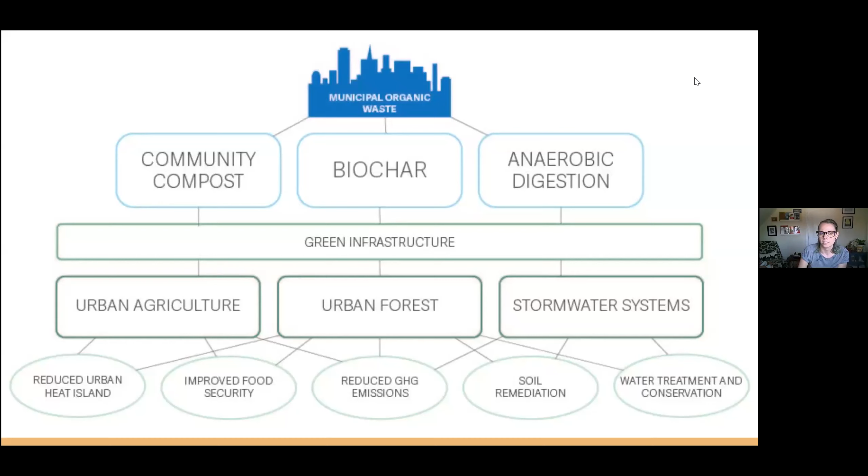Next slide. So we made this graphic to kind of explain our thought process. So we're diverting municipal organic waste from Long Beach into sort of 3 segments. We're going to take the peak organic material and divert it into community compost projects that would stay within Long Beach. Tree trimmings and large wood matter would go into biochar production, and then everything that wasn't suitable for community compost would be diverted into an anaerobic digester. Now, what we would do is take all of the products from this and implement them into green infrastructure projects that are happening in Long Beach, specifically urban agriculture, the urban canopy, and stormwater systems for specific benefits.

Next slide. So there were lots of benefits, but we're focusing on estimating the benefits of reduced greenhouse gas emissions, water treatment and conservation, and a reduction of the urban heat island effect. Next slide. And I'm going to introduce Emma and Ruby, who are going to take you through the stormwater analysis.

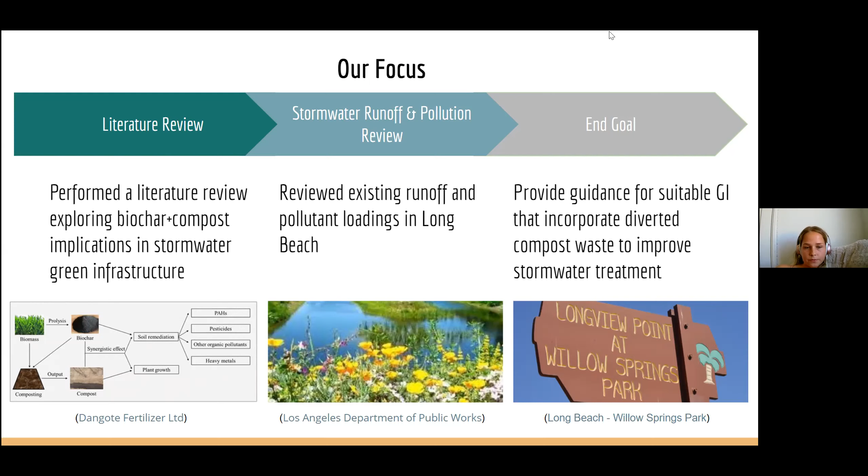So for our end goals, we're basically hoping to review research on compost and biochar-based stormwater contaminant conditions in Long Beach in hopes to provide guidance for suitable green infrastructure that incorporates diverted waste to treat stormwater in a more sustainable manner. And the Willow Springs Restoration Project is something that we hope to include as well. It provides a useful example of existing compatible green infrastructure elements and BMPs for urban stormwater treatment. And we're hoping to use these existing examples as a foundation for more compatible BMP types in Long Beach's region and its pollutant background.

Okay, and the main benefits that we found in our literature review for compost were increased plant nutrition, increase in unwanted substance removal, and then also it helps utilize food waste. The limitations that were found were leaching, and the use of immature compost can take away some of the benefits that you would get from a mature compost.

For biochar, the main benefits were additional unwanted substance removal, increased microbial activity, and carbon sequestration, which helps combat climate change. It's also important to note that biochar's absorptive properties help combat leaching in compost by having nutrients released slower, so that we would be able to decrease the runoff from a first flush scenario through compost.

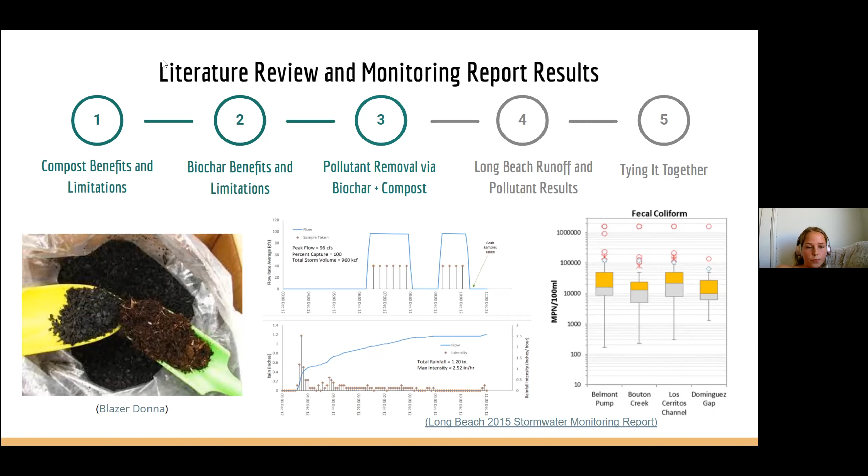So some of the pollutants that we found from literature that are removed via biochar and compost combinations include phosphorus, nitrogen, polyaromatic hydrocarbons, microbes, dissolved metals, and oil, grease, even pesticides. And you can see an example on the bottom right of fecal coliform bacteria loadings that were reported from the Long Beach monitoring report.

So what we also discovered was that across literature, phosphorus tends to have a lot of variability. For example, some compost helped, but other composts failed to make a difference in pollutant removal, and even some worsened nutrient leaching. But the key idea is that biochar has the potential to improve treatment in compost-based systems by absorbing water and nutrients and then slowly releasing that over time. And that's great for plant growth, and it also prevents the effects of the first flush pollutant discharge.

And some of our other data came from the Long Beach monitoring report. You can see that in the middle. From this, we were able to gather a lot of data about the peak flow conditions, the stormwater volumes, rainfall, max intensity. And again, in the end, what we're doing is using all this data to summarize suitable combinations of biochar and compost ratios, as well as their types for use in Long Beach's existing stormwater and pollution background.

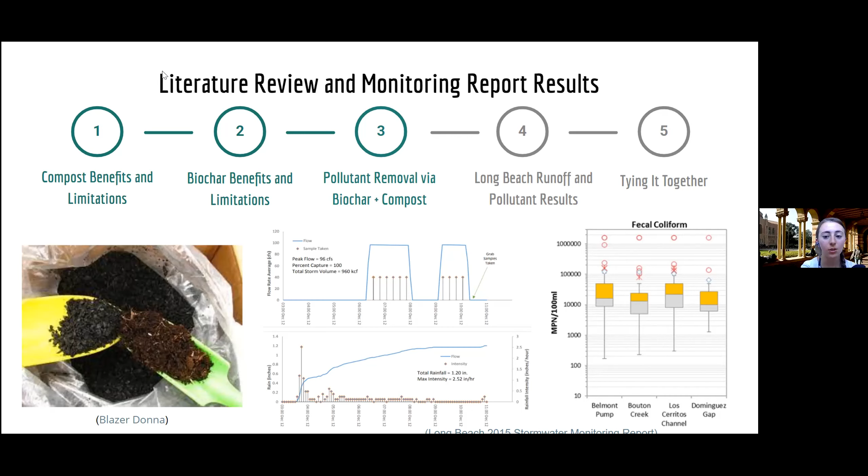And with that, I'll pass it on to the Urban Heat Island Effect group. Thanks, Emma. Yeah, so for our section, you can go on to the next slide.

We also structured it similarly to the stormwater treatment section, where we started with a lit review. And with that, we looked at different ways that urban greening can translate to benefits in terms of reduced urban heat island effect. And we incorporated in our research looking at how diverted organic matter could be incorporated into those urban greening projects to both enhance growth and, by extent, enhance mitigation of urban heat island effect.

And from there, we took what we learned and applied it to a series of 3 geospatial analyses. The first was an NDVI analysis, which we used to look at greenness in Long Beach. From there, we generated some thermal maps to visualize urban heat island intensity across Long Beach. And then we wrapped it up with some reference maps that looked at other relevant information, such as various socioeconomic factors. Next slide, please.

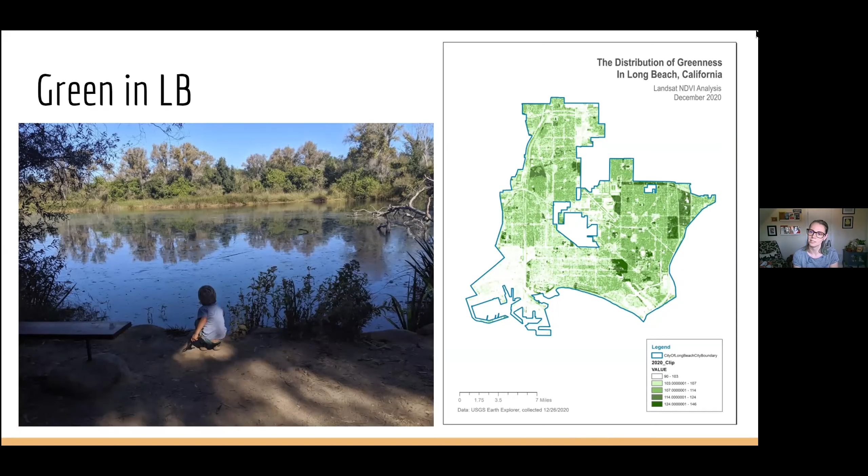And with that, we're going to pass it on to Ryan, Haley, and Tommy to talk about greenhouse gas emissions.

We also wanted to quantify the amount of greenhouse gas emissions that would be saved by switching to this diverted waste model. One way we mapped this was by combining results of the UHI analysis that Madeline previously talked about, as well as a literature review. With this literature review, we found estimates for an energy penalty in urban areas per unit area per UHI intensity, which allowed us to quantify the cost to cool buildings in Long Beach as a result of the warmer city climate.

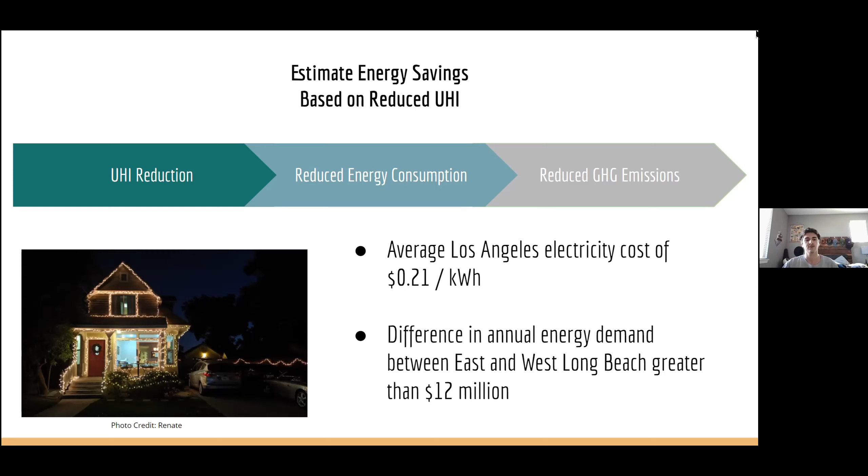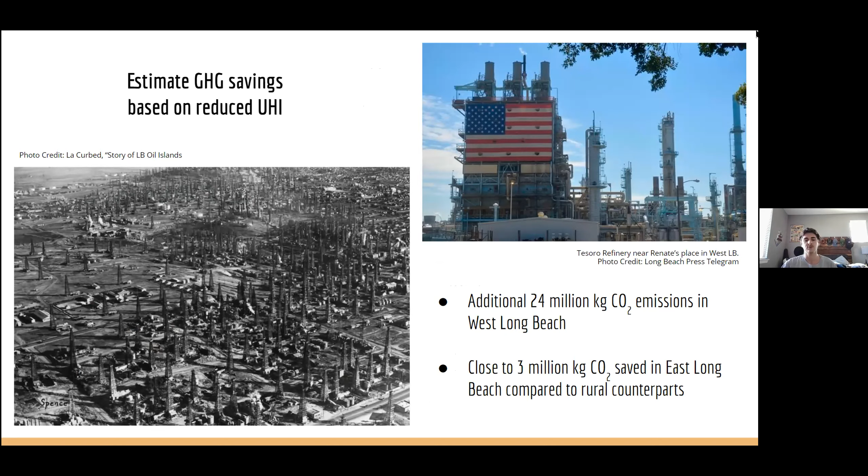Just to produce this amount of energy, there's going to be significant greenhouse gas emissions. Using average values for emissions per kilowatt hour, we found that West Long Beach would emit 24 million kilograms of CO2 per year compared to its rural counterpart, while East Long Beach would actually save 3 million kilograms of CO2 per year.

Another goal was to better understand the greenhouse gas emissions that come specifically from landfills and incinerators. We included incinerator data in our search because Long Beach operates one of the last two functioning incinerators in California. From our literature review, we found that 1 million tons of food waste in a landfill emits about 1,100 metric tons of CO2 equivalent, whereas 1 million tons of food waste in an incinerator emits between 50 and 200,000 metric tons of CO2 equivalent.

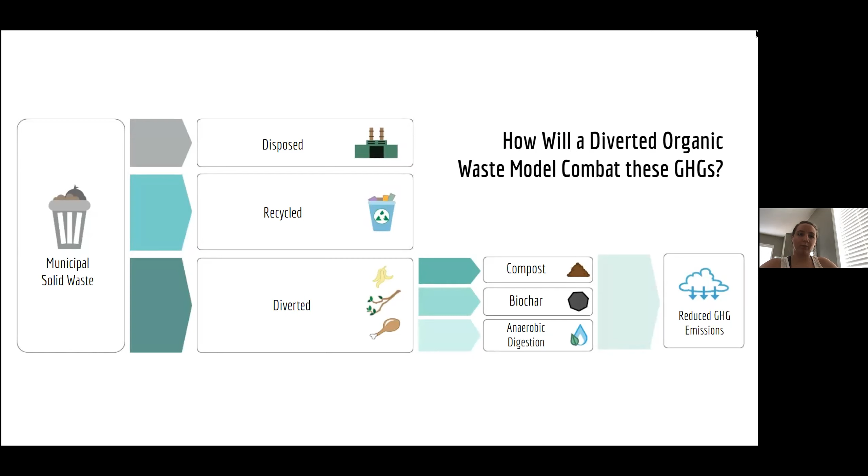So how will a diverted organic waste model combat these greenhouse gases? For one thing, the breakdown of organic material under aerobic conditions, such as composting, contributes only minimally to the short-term carbon cycle. In the case of incinerators, diverting organic waste makes the heating element much more efficient, lowering the amount of auxiliary fuel needed to run the incinerator. This leads to lowered greenhouse gas emissions and can actually lead incinerators to act as a carbon sink when paired with waste-to-energy technologies.

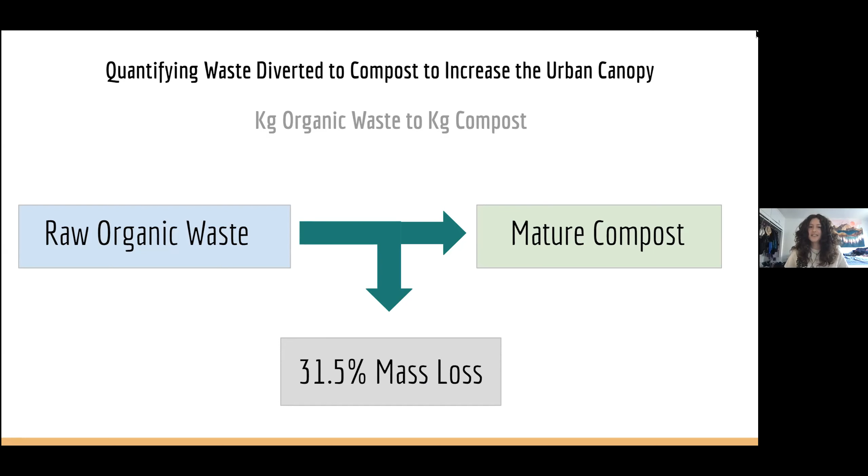The next two slides go over two different intermediary calculations done to quantify waste diverted to compost to increase the urban canopy, which would decrease greenhouse gases and the urban heat island effect. The first is a mass conversion between raw organic waste and mature compost. This is needed because during the composting process, mass is lost as microorganisms break down organic matter and release CO2. Through literature review, we found a 31.5% mass loss from raw organic waste to mature compost.

The second calculation is finding the amount of compost per tree needed to increase tree growth and expand the urban canopy. This was also done through literature review, and different studies were normalized using the nitrogen content of each compost, since nitrogen is the limiting nutrient for tree growth. From these studies, we found a value of 49 kilograms of compost needed per tree.

Thank you guys for listening and being here for our presentation. We hope you enjoyed it. And if there are any questions, go for it.

We can clap virtually.

I would say this was one of the most ambitious projects that I have ever taught. It has so many components. Normally in any quarter, I usually limit them—I say don't do too many things. But I know Renate and all the teams were really passionate, so I said, okay, whatever you guys do, this is your project. I knew the results wouldn't be affected by having so many different analyses. I want you guys to challenge each other and have discussions, because that's more important than having constrained projects. I saw that energy in your teams and in your presentations. There's just so much information and so much work you guys did. So, great. I don't have any other comments, but if you guys have any other questions, other students can ask.

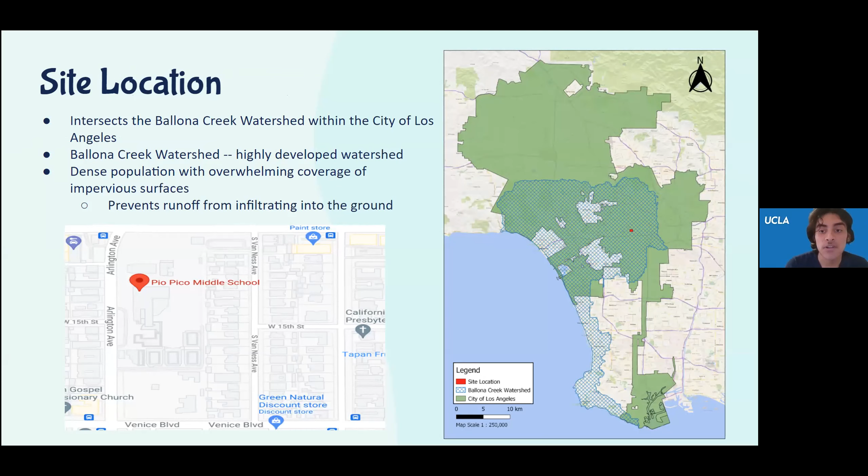To maximize the community benefits behind the Best Management Practice Project, the site will emphasize the implementation of green infrastructure at Pio Pico Middle School.

Our solution involves the implementation of three different BMPs: permeable pavements to help reduce runoff and remove pollutants, biofiltration, which filters contaminants via layers of filter media and vegetation, and a green roof, which can improve stormwater quality and reduce incoming peak flows.

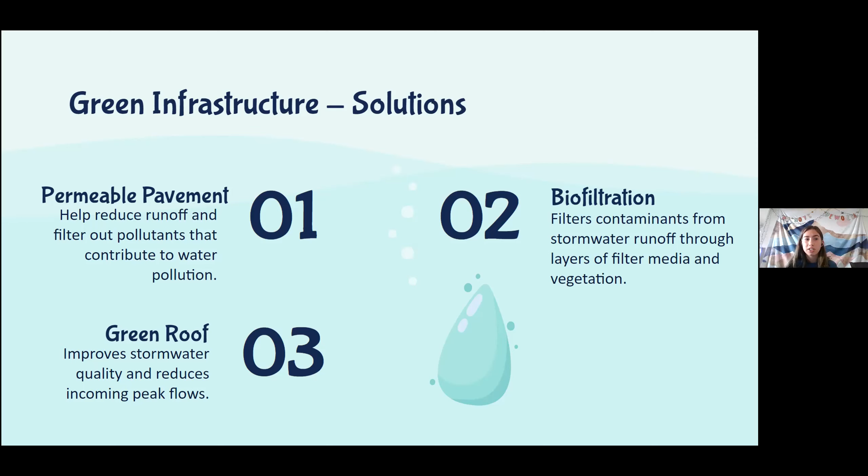The first BMP, which covers the largest surface area, will be a permeable pavement. The pervious pavement is the uppermost layer that will lie upon base materials for proper drainage. Beneath that is an open-graded crushed rock layer that will allow water to infiltrate away from the surface. We've decided to also include filter fabric in our design to retain larger particles. As water slowly moves through the layers, the groundwater table can be refilled.

Since the LA community is prone to flooding due to the high percentage of impervious surfaces, we wanted to minimize the possibility of flooding, worsening economic conditions in an already disadvantaged community. While LA does not receive very high volumes of runoff currently, we expect climate change will bring about extreme periods of wet and dry. To prepare for such events, we wanted to implement a BMP with a long lifespan and minimal maintenance.

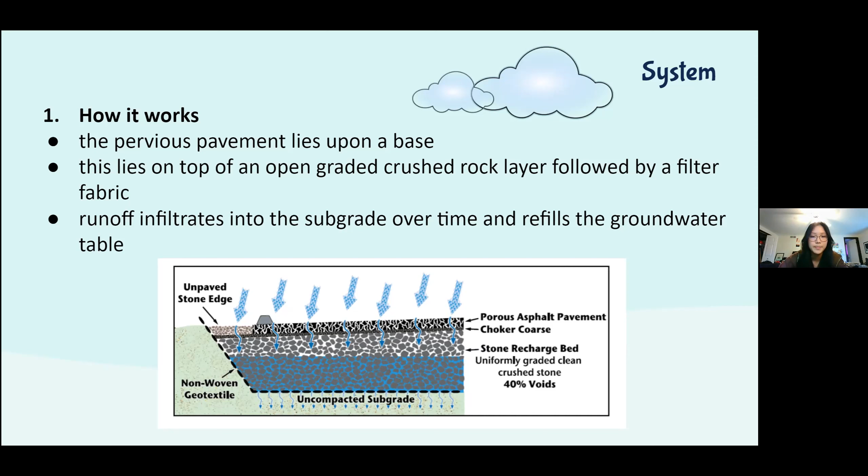This type is also less prone to cracking compared to conventional concrete options, which again can mitigate potential safety hazards.

When determining whether permeable pavements were potential solutions for the issues impacting our sites, we looked at site-specific conditions. The area has a high percentage of impervious area with little room for infiltration, which leads to nearly all the rainfall becoming runoff. As previously mentioned, the school is an economically disadvantaged area, so reducing runoff will reduce the risks of damages caused by flooding to the school and surrounding houses and families living nearby.

Also, the area which we will convert to permeable pavements does not have heavy vehicle loads or high-speed traffic or high sediment concentrations that would normally damage the pavement, so it's a good site for permeable pavements. They can also act as a sink for pollution that would normally run off impervious surfaces. The installation would not be obstructive to how the school functions, because it would just be replacing the current pavements and not taking up any more space.

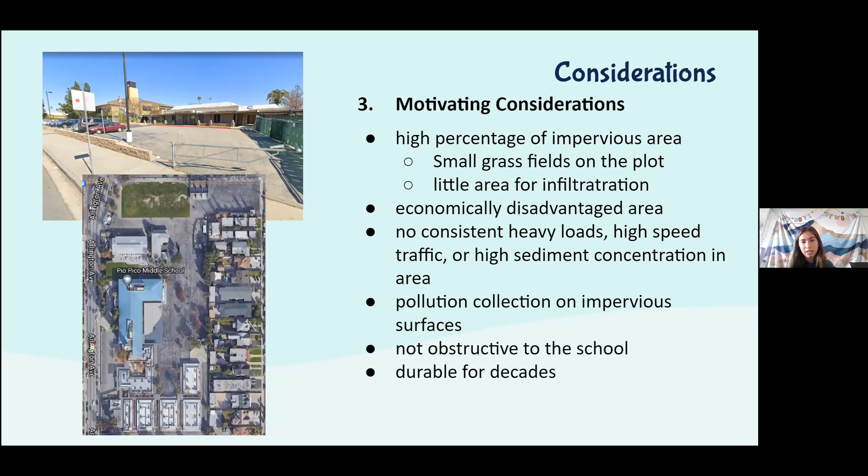They will be strong for decades with minimal maintenance, like street sweeping and vacuuming, to ensure the pores don't get clogged. And once they do get clogged, you might have to replace sections of it.

The total cost of the installation of the permeable pavement includes materials, labor, equipment, and other general requirements, and it's just a little over $1 million. For all estimates, we assumed unionized labor rates, which is generally 20-25% more cost intensive than non-union labor.

The unit of measurement is square footage. The unit cost is $6.75 per square foot. We also estimate the maintenance cost to be about $2,000 per year after installation in order to preserve the BMP and help maximize its life cycle.

I'll give it to Kathy to talk about biofiltration.

These gas stations and auto body shops are potential sources of oil and heavy metal contamination in stormwater runoff. Additionally, the large residential area surrounding the school is a source of nutrient and pesticide contamination due to the many lawns in the residential area.

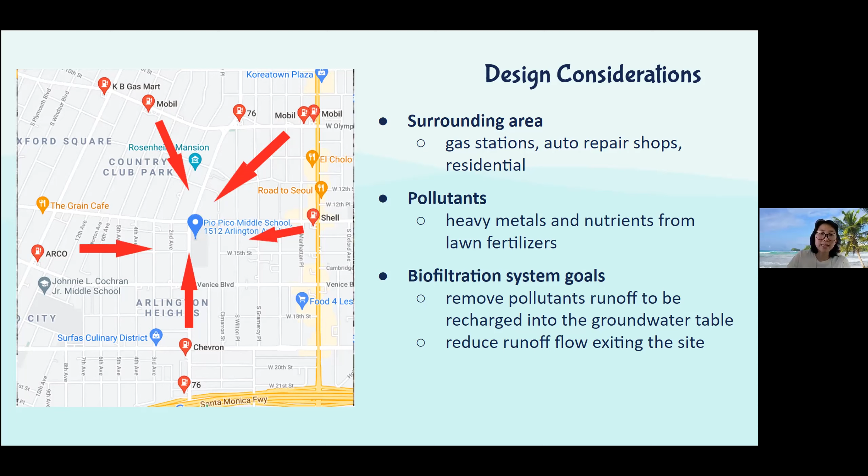In designing the biofiltration system, we calculated the design volume to be 9,188 cubic feet of runoff for the 85th percentile storm event in LA. This also takes into account the effects from the other BMPs we'll be implementing, which are the permeable pavement and green roof, making the biofiltration system the last point of treatment for runoff on the site. We then calculated the surface area needed to treat this design volume to be 4,324 square feet.

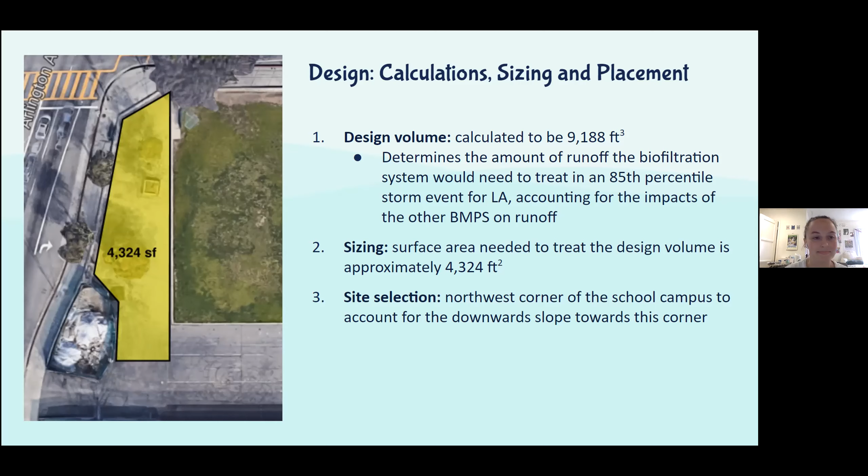The system will be 3 feet deep in total, according to LA's design criteria. The layers in the system will include 3 inches of mulch on top, filter media composed of 70% sand, 20% compost, and 10% biochar, coarse sand for the transition layer, and gravel for the bottom drainage layer. We recommend this composition for the filter media because organic media such as compost augmented by biochar has shown better results in removing the pollutants we're trying to address at this site.

For the vegetation in the system, it must be suitable for the dry climate in LA. So we recommend using both the California meadow sedge and the clustered field sedge because both species are native to Southern California and are both drought and flood resistant. Grasses are also more suitable for biofiltration systems in urban areas, and both species are tolerant of foot traffic, which would be a benefit for a school campus where there might be heavy foot traffic.

The biofiltration estimate was similar to the permeable pavement. We had the same assumptions for unit labor costs and unit measurement. The only difference is the unit cost, which is about $9.80 per square foot, and it's a lot higher than the other costs because the bulk of the cost comes from the subterranean site work and earthwork.

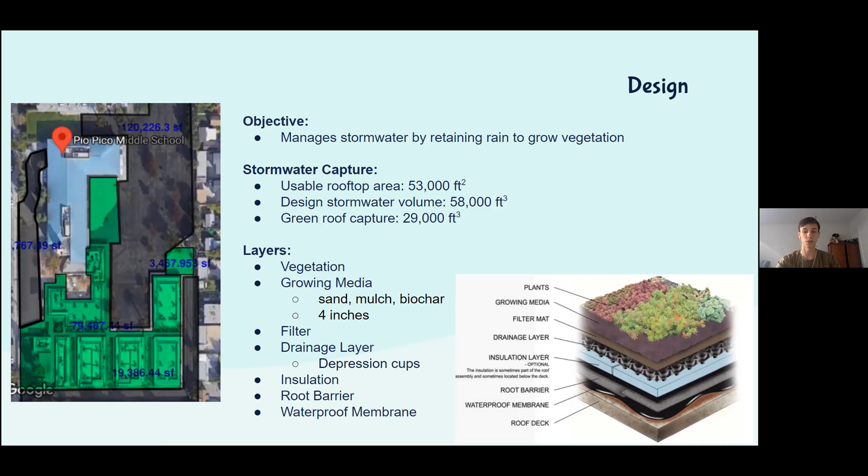We wanted to optimize sustainability in our design, so we referenced strategies for low impact development in dense areas. We picked drought tolerant plants, ideal for a dry Mediterranean climate because it reduces irrigation requirements. Weight is often a limiting factor for green roofs, so we minimized this by using dense and lightweight plastics, as well as a thin growth media layer. Walking paths will have to be placed around the green roof to prevent compaction and reduce maintenance needs, and fertilizers and irrigation will be needed as necessary.

The estimate for the green roof is a little different from the others. We broke it up into the installation of the green roof itself and also the irrigation system. We thought it was important to separate these because they have different associated maintenance costs. The irrigation system will typically require a lot more maintenance, even though in an ideal world the system is installed flawlessly and lasts forever.

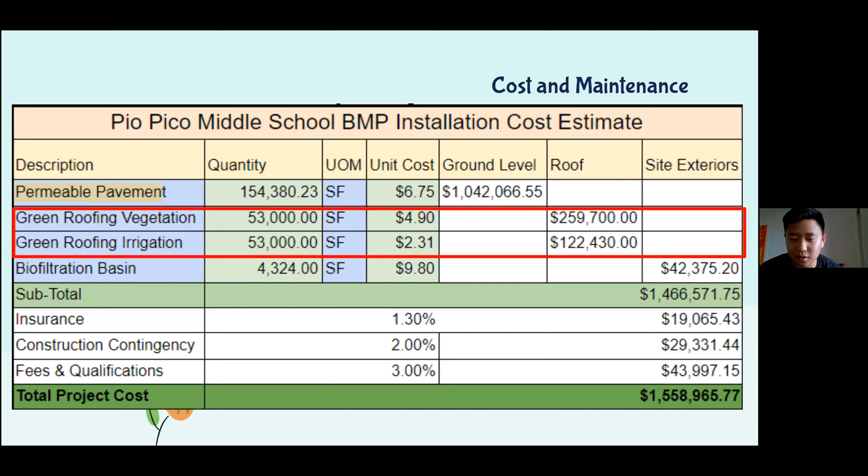For the challenges associated with our plan, first, it'll cost upwards of $1.5 million to implement, so this is obviously a difficult project to implement on a small budget. The green roof does have the potential to save on energy costs due to its insulated properties, but it could take a significant amount of time to see these savings add up. Additionally, the site might need preparation before implementing the BMPs. For example, if the building for the green roof doesn't support the weight load, structural supports may need to be installed, which will have additional costs.

The cost to benefit ratio of the permeable pavement may not be as good because the primary benefit is infiltration of stormwater, and in Los Angeles it doesn't rain too heavily. But Dawn did say that we do expect climate change to bring different weather patterns, and for the permeable pavement to have a long life cycle with maintenance.

Now for the benefits. Aside from improving stormwater quality and reducing runoff, it provides many additional benefits. First, the biofiltration and green roof systems will promote biodiversity through implementing native plants. We're also introducing a lot of green spaces, which can be used for activities like exercising, gardening, and socializing, which could improve the mental health of students. This is particularly significant for our area because communities of color have historically worse mental health. The permeable pavement also has a cooling effect due to evaporative cooling within the pores, which traditional concrete does not have.

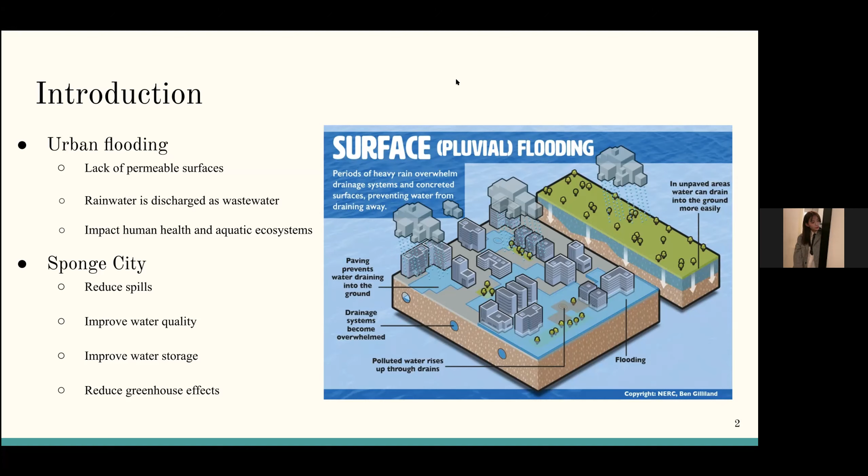But few Sponge City studies are based on a unified comprehensive study, mainly because the conditions in many pilot cities are not similar. Another challenge is that most of the flow control of rainwater results come from simulation rather than actual measurements. So the goals of our project are to overcome the difficulty in data acquisition and review the achievements of Sponge City on runoff management, pollution removal, and elimination of heat island effects, to give comprehensive planning options for Sponge City construction.

Now I'm going to talk about the approach of Sponge City design. The Sponge City programming is a strategy of integrated urban water management that has been started in China. Sponge City refers to a city that, like a sponge, has good elasticity in adapting to environmental change. When rainwater resources are sufficient, we can absorb the rainwater to decline in peak flow, and also the stored water can be reused as needed.

The features of the Sponge City should be friendly with the environment, combine natural and artificial design, and emphasize the importance of sustainable and low-impact development. The goal of SCP in China is that more than 80% of urban land area will be able to reuse 70% of rainwater locally by 2030.

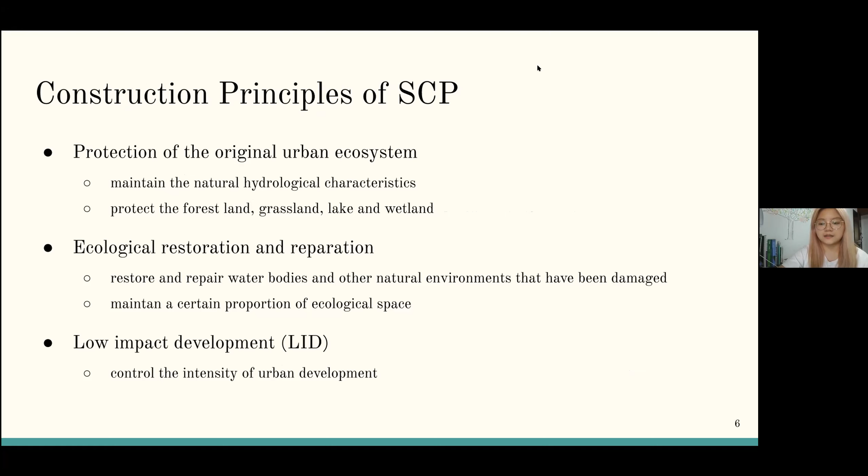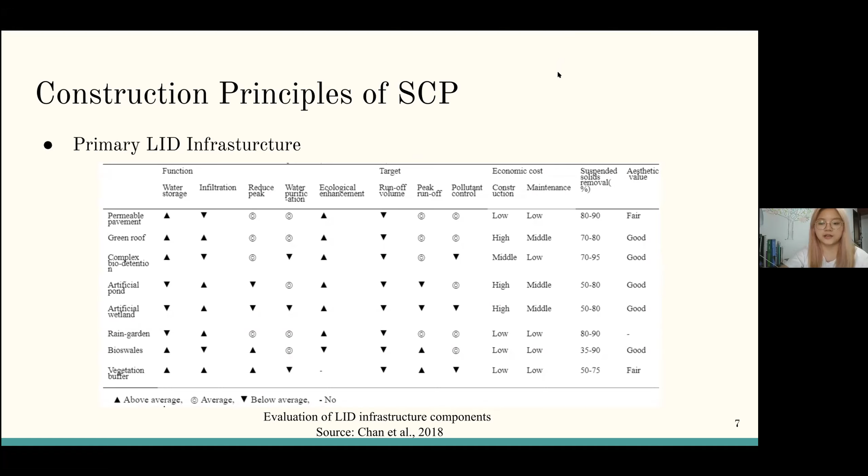Next, we will discuss the function of a sponge city, including stormwater management, pollutant control, and reducing urban heat island effect.

This map shows the precipitation distribution for different cities in China. For the cities in red boxes, we will review the stormwater management performance, and for the cities in blue, we will review the performance of pollutant control. Finally, we will talk about the economic analysis for a pilot sponge city in Qingdao.

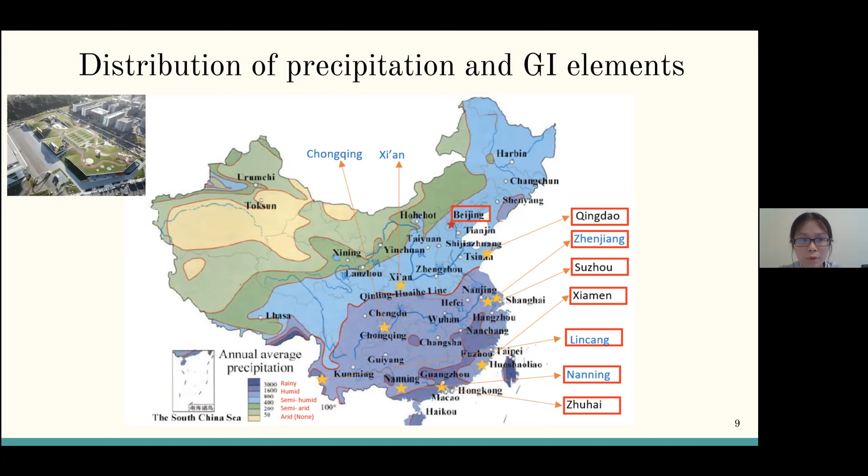The most common green infrastructure elements used in these studies are green roof, permeable pavements, vegetated soil, bioretention, and rain garden, as you can see in this picture on both sides.

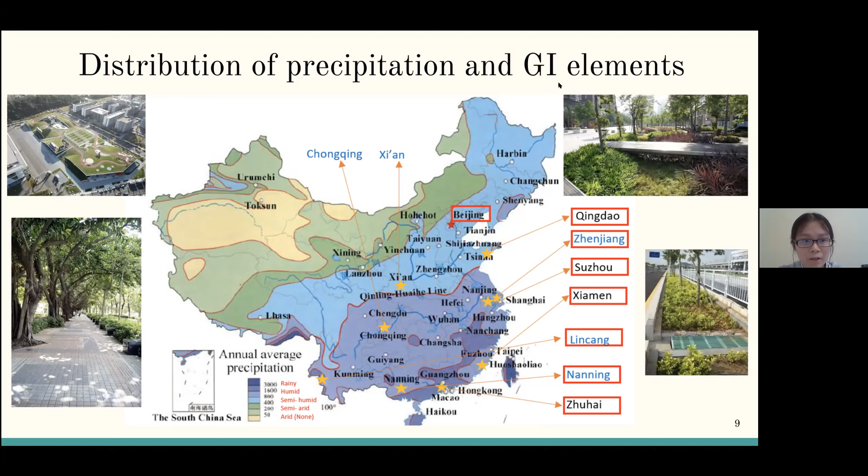Next, please. First, Tianyu and I will talk about the stormwater management performance for these sponge cities in terms of runoff reduction and peak flow reduction.

In order to find the key factors deciding the performance of sponge city rainfall control, we analyzed the data of 8 sponge city programs, and we found that there is a correlation between green infrastructure area ratio and performance. This table lists four things: the 2 evaluation standards of stormwater management, which means changes in the runoff before and after the sponge city construction. In addition, the average annual rainfall and the green infrastructure area ratio.

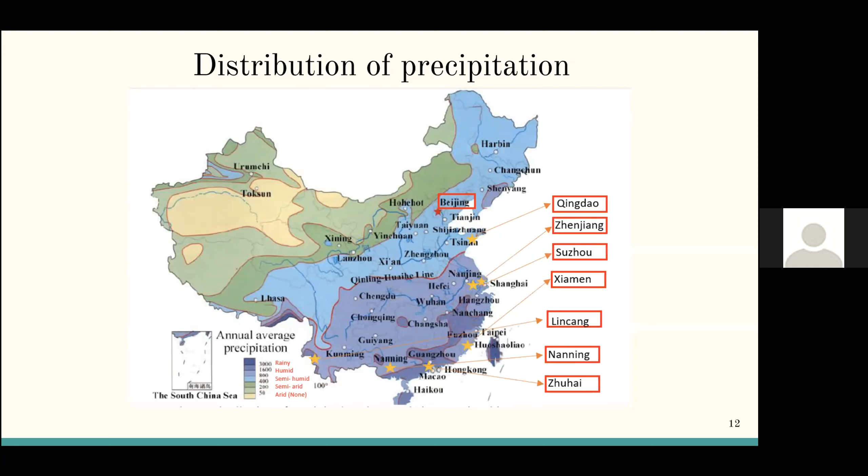The area ratio is adding up all areas of different types of green infrastructures and uses this value to divide the area of the project. The map shows the location of these 8 sponge cities and their precipitation information. We can see most of the cities were located in rainy to semi-humid areas, and most of them are located near the coast. We use Excel to analyze data and plot 2 figures.

We also fit a linear regression for the total green infrastructure area ratio and the peak flow reduction. The positive correlation is found to be less than the one for runoff volume reduction. And from the linear regression equation we were getting, we can approximate that for every 10% of green infrastructure implemented in the area, there will be around 3% reduction in the peak flow. However, this could change as the soil gets saturated.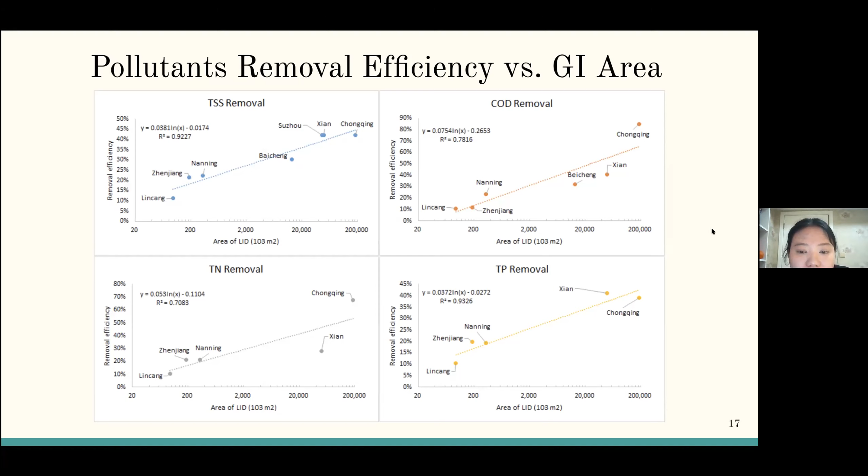This figure shows pollutant reduction ratio versus GI area of 4 kinds of pollutants. A positive correlation between each pollutant and the GI area can be observed. For TSS and TP, the reduction ratio increases as GI area goes up. However, when the area becomes large enough, the pollutant reduction doesn't increase anymore, probably due to the limitation by other factors like rainfall intensity and duration. As for COD and TN, even with large areas, an increase in pollutant reduction can be observed, which suggests that removal of the 2 pollutants is influenced by GI area in a much wider range.

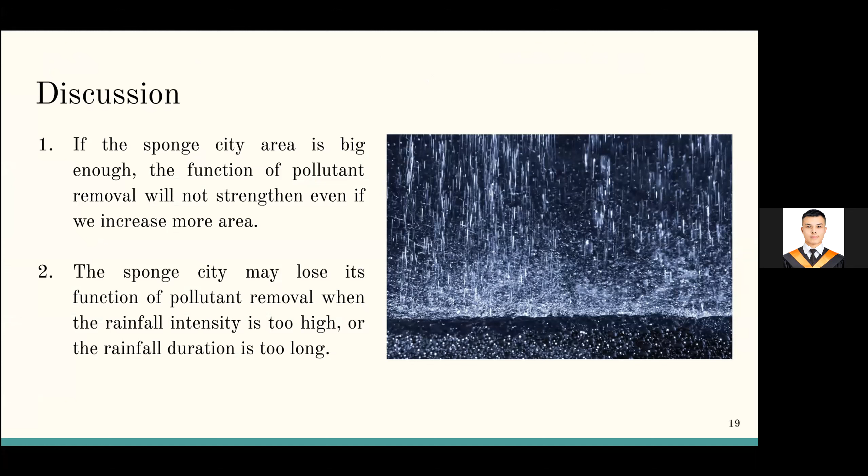In this part, we want to know the relationship between the pollutant and the rainfall event. We found that sponge city is functional in decreasing each pollutant. We also found that the effect is obvious while the rainfall duration is short and the rainfall intensity is low. Next slide. Then we get 2 important results. If the sponge city area is big enough, the function of pollutant removal will not strengthen even if we increase more area. The sponge city may lose its function of pollutant removal when the rainfall intensity is too high or the rainfall duration is too long.

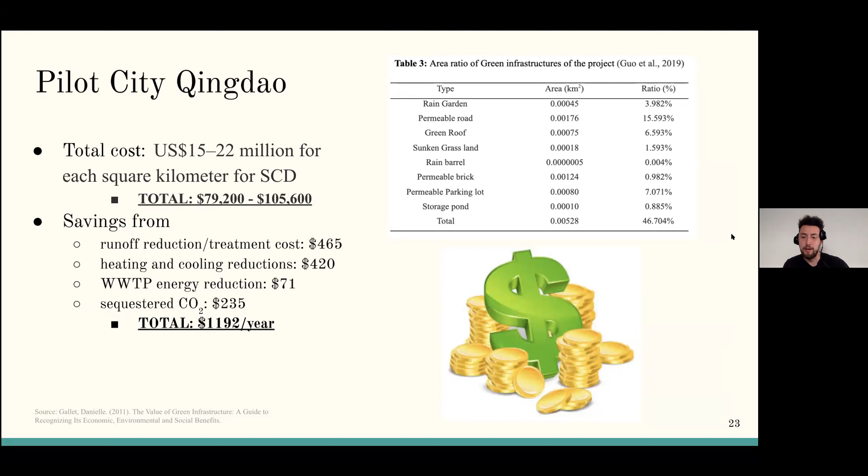Now that analysis was assuming a 50% retention rate of rainfall from each development, but the overall goal of a sponge city is to collect and reuse as much water as possible. So increasing that percentage to 70, 80, or even 100% would see a bit more savings per year. Also, if every building had a green roof installed, then the savings would double, assuming a 50% retention rate, or nearly triple with a 100% retention rate.

But it is also important to note that it was difficult to put a dollar amount on benefits such as the quality of air, water, or even the quality of life of residents. And even though the savings seem very small, one of the biggest benefits would be the reduction of flooding that can cause hundreds of thousands of dollars in damage and even claim human lives. So the cost may seem high, but the benefits definitely seem to outweigh them.

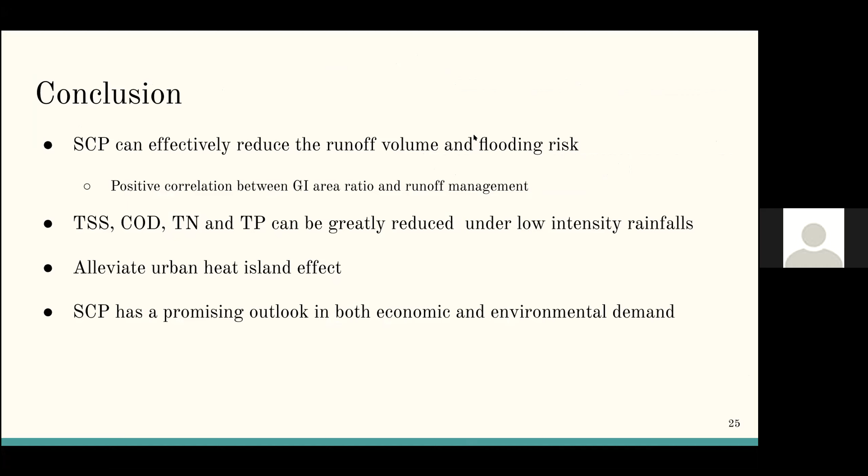Next slide. These are the conclusions of our main contents. Due to time reasons, I won't say that again. And that's all we want to show.

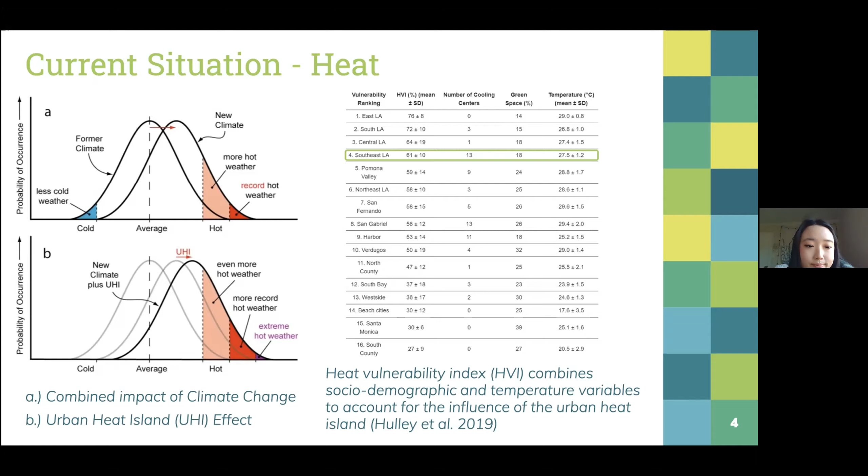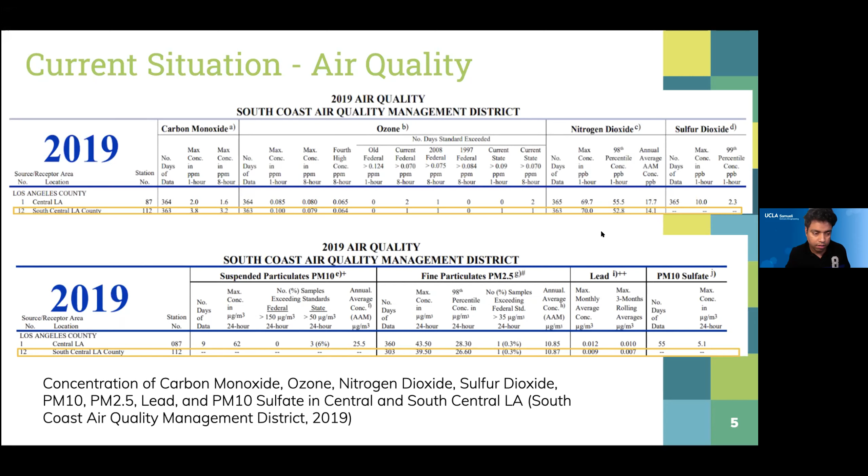Okay. Before we dive into our design solution, I will introduce what we want to achieve through this project. We hypothesize that as a result of our green infrastructures, the residents of our proposed housing complex will enjoy improved air quality and cooler temperatures during extreme heat events. And ultimately, we want to create shared green spaces that would increase community connectedness.

All right, so the first green infrastructure that we intend on implementing into the housing complex is the green roof. Roofs are in general a strategic point to address urban cooling, as they make up upwards of 20% of urban land cover, and this includes LA as well. And although they may require an additional irrigation demand, which might be a problem for dry land environments like LA, this can be minimized with the selection of drought-tolerant vegetation.

And so green roofs particularly improve indoor urban air temperatures in that they provide shading. They also increase the albedo, or the reflectivity of the roof, thereby deflecting a lot more sunlight away from the building. And they also cool the atmosphere with evapotranspiration. And so in semi-arid climates like Los Angeles, these are important processes during the summertime when the atmosphere is dry and extreme temperatures are common.

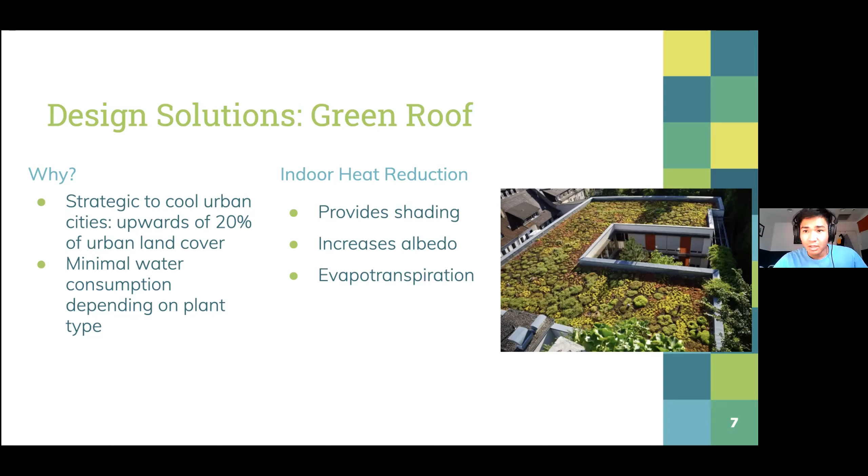All right, and so for specific design, we intend to use Sedum sediforme, which is a perennial plant that is drought tolerant and native to coastal Mediterranean regions. And one study has shown that it can last up to 88 days without irrigation, while also being effective at indoor cooling in semi-arid environments.

And so for our design, this plant will cover the majority of the roofs, so approximately 1.8 of the 3.4 acres at our site. And of course, with the green roof, there's other layers to it, one of which being the loam growth medium. This can be a 4-inch medium that will be implemented, and then some others as well. And then on top of that, we have barriers that are integrated into the design so that residents don't walk on the green roof elements, which would result in soil compaction.

And in terms of maintenance, the roof is watered bi-weekly, cut back in the spring or early summer, and should be replaced after 45 years.

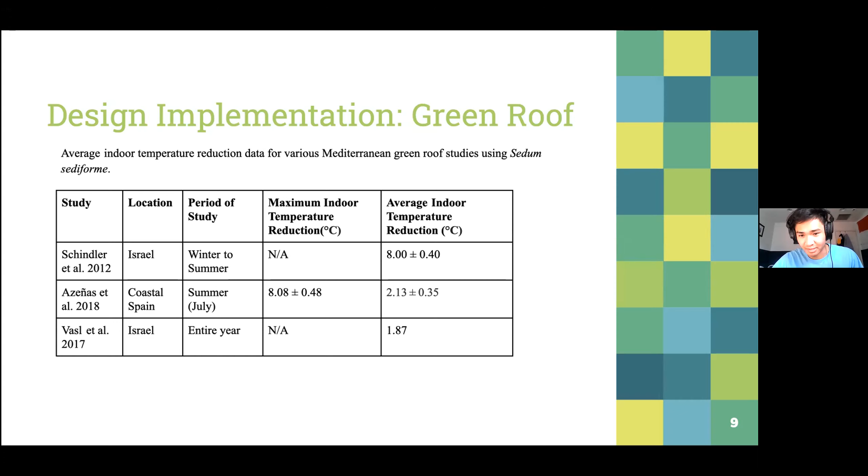So next we propose the use of urban tree canopies. Urban tree canopy can act as nature's air filter and air conditioning, so it can tackle both air quality and heat management, hence could also improve public health. It also aligns with LA's Green New Deal, which calls for increasing forest canopy, specifically in low-income heat zones, by 50% by 2028. For air quality, urban tree canopies can remove air pollutants and improve air quality in the area, especially since LA has one of the worst cases of air pollution in America.

We proposed the use of street trees since particulate matter is the highest by the streets due to vehicular traffic emissions. Additionally, urban tree canopies can dilute and disperse air pollutants through barriers at the ground level using urban hedges, which can also reduce noise pollution, improve aesthetics, and provide privacy. As such, we proposed hedges to be installed around the perimeter of the housing complex, which would be especially beneficial for the apartments on the ground floor near the streets. As for heat management, the plants used in urban tree canopies can reduce heat through shading and evaporative cooling.

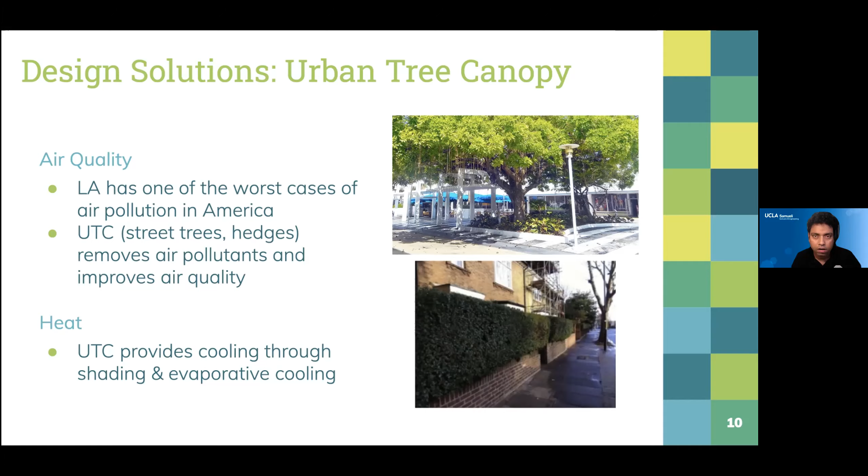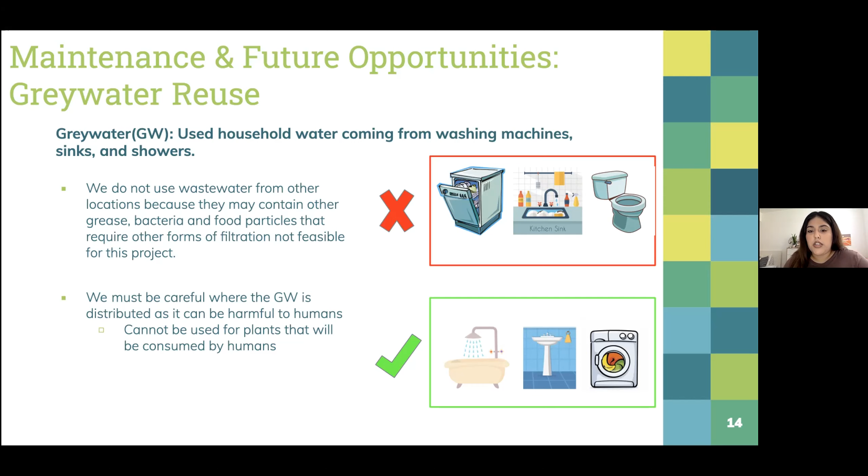Some benefits to this design would be the reduction of water consumption for our location. Implementing a gray water reuse system can save homes up to 40,000 gallons of water a year, which in turn would reduce the water bill. Though the recycled water can be harmful to humans, it can actually provide nutrients that would allow plants to flourish. This would be beneficial to the site as we plan to have many green spaces, and as we mentioned, our green roof would require bi-weekly waterings of approximately 58.77 gallons per day. So this would be a great additional design for our site.

Some limitations to this design are maintenance requirements. We would need to replace or clean the filter at least once per week. And we would only be implementing outdoor use because of the possible health risks that could arise, and it being more expensive as well.

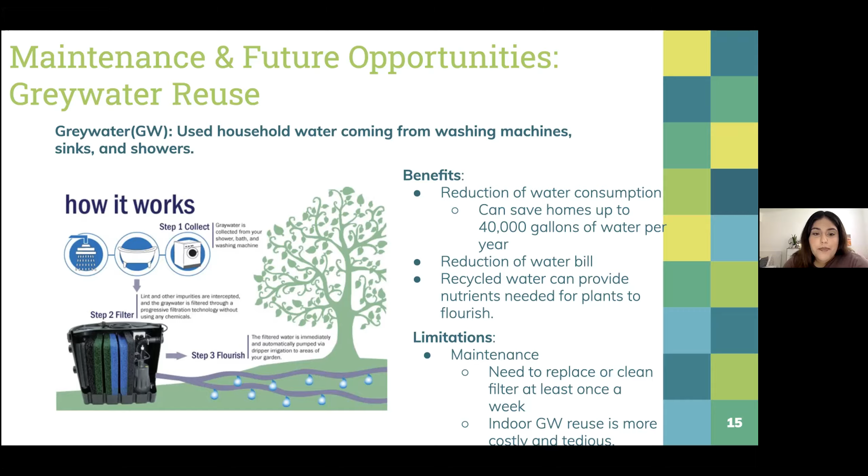Another future opportunity that we wanted to mention in our project would be green parking spaces. In general, for the project, we want to encourage street parking to maximize the space we have available. But as per green parking space availability and resident requirement, parking spaces that use green facades with climbing plants and a wire trellis system would be a good option, since they don't require building a concrete wall and are completely green. Some benefits include no extra structural support, added privacy, and cooling and shade for vehicles. The last benefit would be that it is inexpensive and easy to maintain.

To conclude, through air pollution removal, shade, and evaporative cooling, we hope that the green infrastructures proposed can help improve air quality and manage hot temperatures for the residents in the city of South Gate, where high population density and urbanization result in high harmful emissions and enhanced urban heat island effect. This can improve the residents' quality of life as their health is improved and their comfort is enhanced. Additionally, gray water reuse can make living in South Gate City more sustainable and hopefully more affordable in the long run, improving the living situation of the underserved community in South Gate.

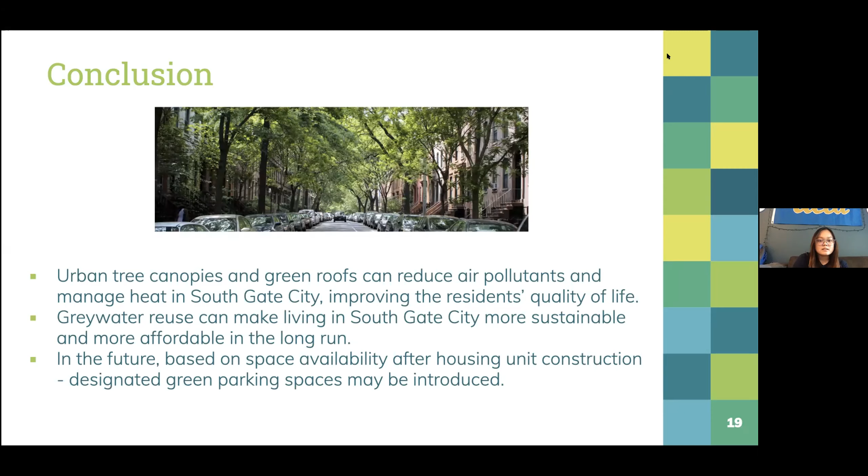As discussed earlier, future developments also include installing designated green parking based on space availability after construction of the housing unit. This brings us to the end of our presentation. Thank you for listening and feel free to ask any questions.

I want to make one comment: for gray water, you can't inject into stormwater. There is a regulation for it. For injection, you've got to disinfect, meaning you have to install UV disinfection so that all the gray water has to pass through that. There's a policy in California because of the concern you mentioned about pathogens. But it's the future that you'll have to use gray water, because nobody will pay for clean water, since every time you have drought, you'll have lots of stress on it.

Okay, so do we have any other remaining live presentations? I don't see any in the comments. Okay, so we have two more presentations, GI Joe Bruin and Miles Avenue Elementary School. Who is going to go first? Which one am I going to play right now? If I don't hear from anybody, I'll just play whichever is first in my list. Maybe it's alphabetical order. Okay, I won't waste time. Let's play one of them.

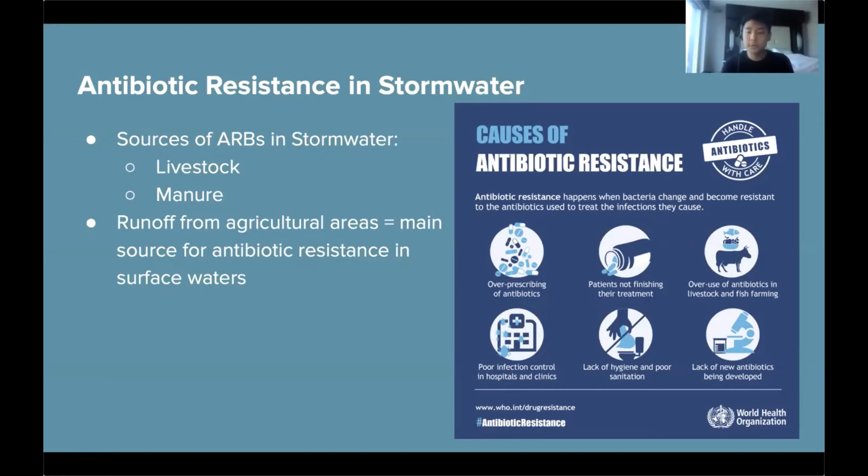As such, the removal of ARGs and ARBs in stormwater can help lower exposure to resistant pathogens and lower deaths caused by ARBs.

There are three main types of BMPs, or best management practices, to remove ARGs in stormwater. Number one is constructed wetlands, which have advantages such as being cost effective, having a high removal rate of ARGs, and not being advanced or unknown technology, so it's easy to use and maintain. The cons are that its efficiency depends on the age of the wetland, seasonality, and plant presence, and there is also a large land requirement, making it unfavorable for urban areas.

Biofilters are the next option, and their pros are that they suit urban landscapes, are low cost depending on the geomedia used, remove many different types of contaminants, and are low maintenance, making them sustainable long term. Their cons are that biofilters utilizing biochar show decreased efficiency over time, and the durability of the biochar decreases in areas with freeze-thaw cycles.

That's not an issue for LA specifically, though there is also potential for heavy metal contamination in the effluent.

Lastly, permeable pavement is also a good alternative to impervious surfaces, so it's good for urban areas. It removes many classes of pollutants and can reduce runoff and improve groundwater recharge, therefore reducing the amount of curbs and storm sewers necessary.

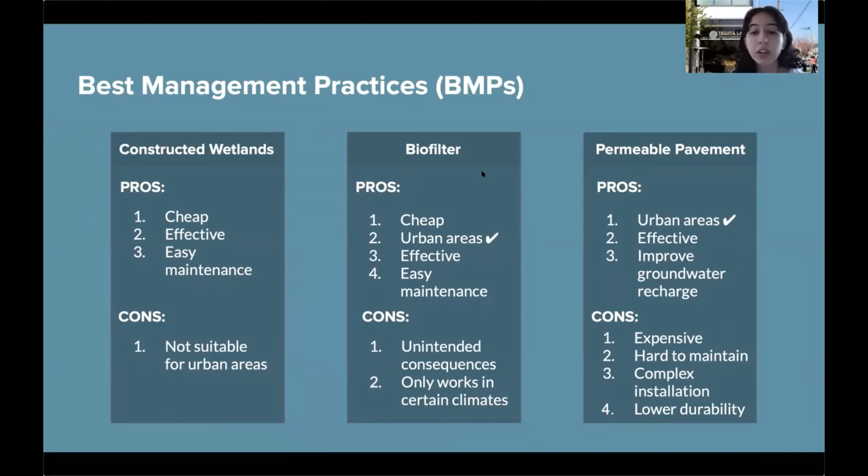The cons are that its maintenance is very difficult as clogging is common. It has lower durability than traditional pavement and complex installation, as it is still new technology, so not many people are familiar with it and how to install it.

Research has shown that different BMPs can effectively remove ARGs in stormwater. For constructed wetlands, removal efficiency is 45 to 95%. For biofilters, 38 to 99.8%, and for permeable pavement, 39 to 98.6%.

The biofilters show the higher removal efficiency and are therefore the most promising BMP for removing ARGs. We also found that introducing geomedia to the biofilter systems can increase that removal efficiency even more.

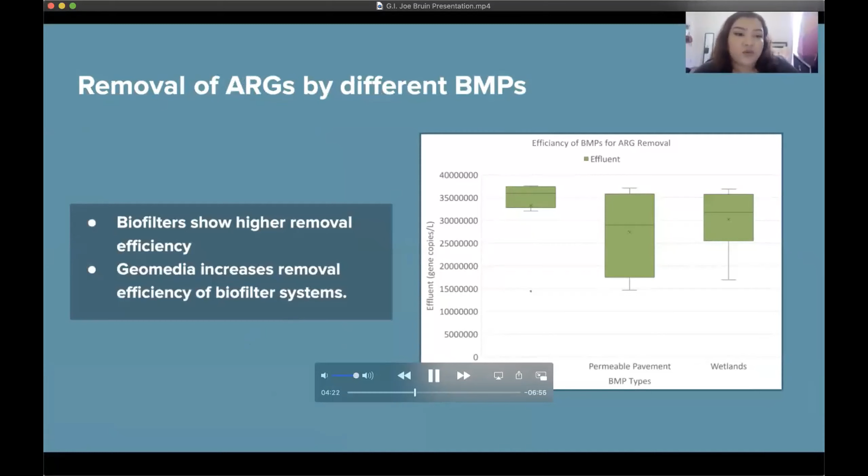The three types of geomedia we looked into are iron-based amendments, biochar, and zeolite. The iron-based amendments, such as zero-valent iron powder and iron oxides, are added to the filter media. This media is derived from waste materials such as iron filings and water treatment residue. Iron filings use adsorption, coagulation, and inactivation to remove pathogens. Then we have biochar, which is a charcoal-like substance derived from the pyrolysis of biomass waste.

There are several types of biochar, including wood and grass biochar, which have different characteristics. Additionally, the temperature at which biochar is pyrolyzed also alters its characteristics. We looked into wood biochar in this project and considered a pyrolysis temperature of about 500 degrees Celsius.

In terms of zeolite, this media is composed of different minerals. This media is microporous and has high cation exchange capabilities. Natural zeolite can be exchanged with other ions to alter its characteristics, and in this study, we considered copper exchange zeolite.

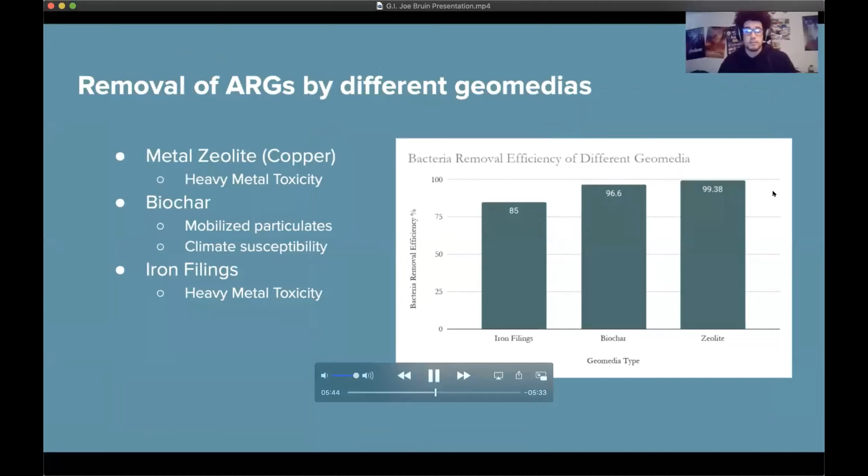When it comes to ARG removal, all three geomedias proved to be quite effective, having removal efficiencies greater than 80%. It is because they are so effective that it is more important to evaluate these geomedias based on their material properties rather than their removal efficiency.

For example, metal zeolite and iron filings contain heavy metals, so there is a risk of heavy metal toxicity in the effluent. So despite both zeolite and iron filings being highly effective and durable antimicrobials, the lack of long-term research on metal-based geomedias and the potential health risk of metal elution makes biochar more favorable.

However, one strong argument can be made that metal-based geomedias are more resistant to fluctuating weather conditions than biochar. But in the proposed LA area, that is not a concern. Warm temperatures and intermittent dry-wet periods are common in the LA area, so extreme weather conditions are not an issue. In fact, the consistent warm LA weather can actually increase the removal efficiency of biochar, making it an even more ideal candidate for our proposed site.

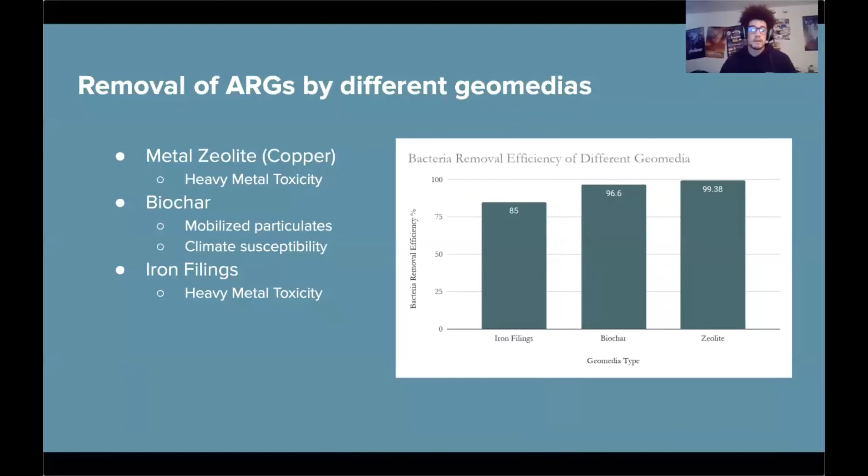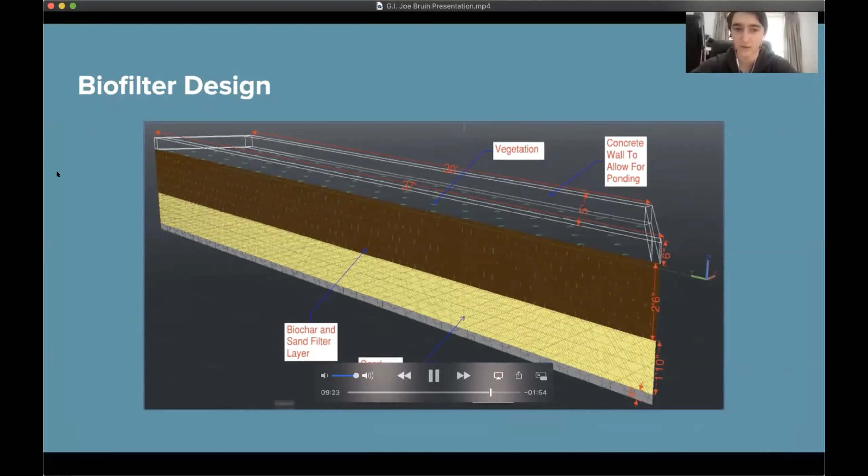There will be vegetation on top. The first layer will be the biochar and sand filter layer, which is where most of the ARG removal happens. Below that is the sand transition layer, and below that is the gravel drainage layer. It is also important to note that we needed to linearly scale up the dimensions used for biofilters in labs in order to meet the 85th percentile water quality design event with the limited surface area we had available for construction.

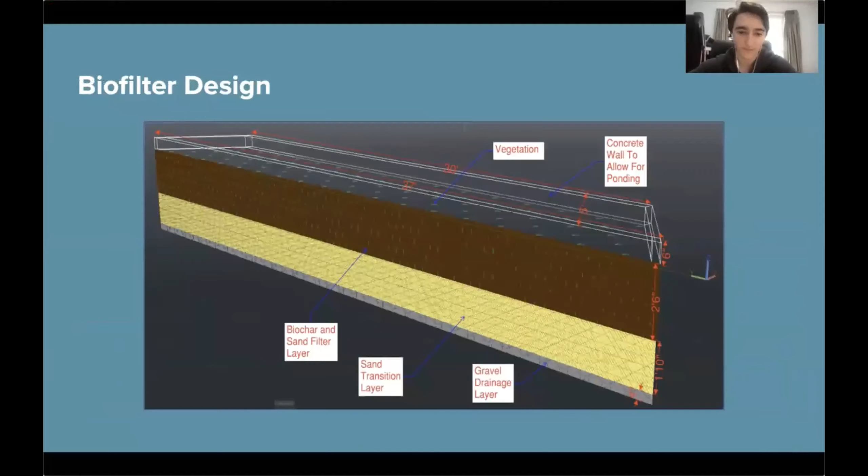Based on the removal calculations for the site we selected, we extracted an annual storm volume of around 163,000 feet cubed and an 85th percentile design storm volume of around 13,000 feet cubed as shown previously.

Using around a 10% error margin for the concentration values due to the sporadic nature of ARG concentration readings and also rounding, we resulted in a significant drop in ARG concentration by the time the effluent leaves the single cycle biofilter: around 200,000 gene copies per feet cubed using iron filings, around 45,000 gene copies per feet cubed using standard biochar, and around 8,000 gene copies per feet cubed using zeolite. We got identical results for both the annual and the 85th percentile design storm.

Overall, a sand-based biofilter can produce at least an 80% efficiency in removing ARGs from stormwater, but having different combinations of geomedia can further improve the efficiency. We ended up choosing biochar as a filling because it works great with LA's climate and doesn't pose any health concerns. We do recognize that many issues can exist, such as bacterial runoff from the compost, clogging of the biofiltration system, and chemical weathering of biochar.

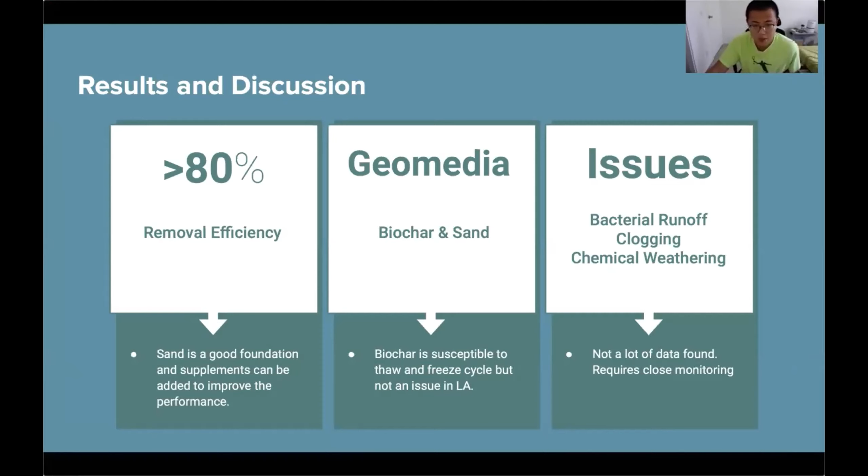In conclusion, we weren't able to find a lot of large-scale implementations, but we took what's already been proven and verified in labs and designed our own biofilter off of it. Still, many issues can occur with this approach, and we think analyzing and quantifying those issues can be one of the future research directions.

ARG is one of the biggest issues in stormwater. So I'm glad that they did some data analysis and saw some results, what kind of amendments would work. So we have two more presentations. I just received one, but before that, I'll play Mile High Elementary School's presentation.

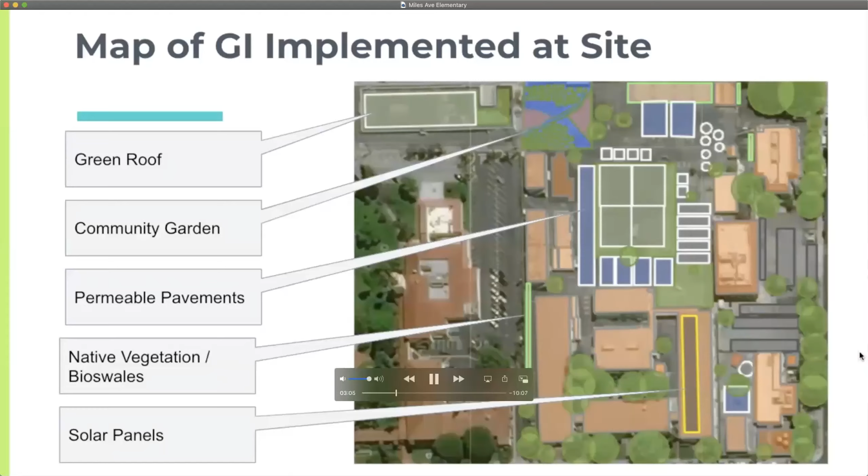Now we're going to go through the energy cycle analysis. Miles Avenue Elementary School has a total population of 980 students, which is a relatively high population. For this reason, we use the 95th percentile energy demand to calculate the demand value of 13,728 kilowatt hours per year. We believe that solar panels are the solution to this dilemma.

You can see here that we're going to install the solar panels on one of the roofs of one of the main buildings.

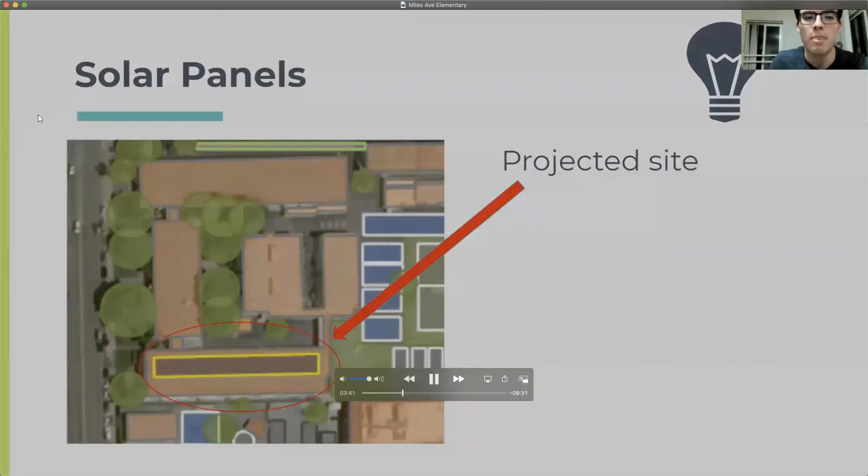So we believe that the system size that would be the best combination of energy capture and price would be 94.4 kilowatts. This system size would have an upfront cost of $283,000, which seems like a lot.

However, the annual production from the system would be 155,000 kilowatt hours. And when you calculate the net annual revenue that the system would generate, it would be around $23,000. The payback period for the system would take around 12.5 years, which is about half of the system's lifespan.

So that means the system would generate about $280,000 in revenue following the payback. Now we're going to go through the water cycle analysis. Miles Avenue Elementary School has a water consumption of about 6,700 cubic meters per year, so we decided to implement green infrastructure to try to satisfy this demand.

Proposed green infrastructure is natural turf, and Bermuda grass is our selected grass species for this turf, as it is a native species to Los Angeles and is able to resist its dry climate, so it requires less irrigation than other grasses. It can serve as a field for athletic use and it has the ability to reduce the urban heat island effect.

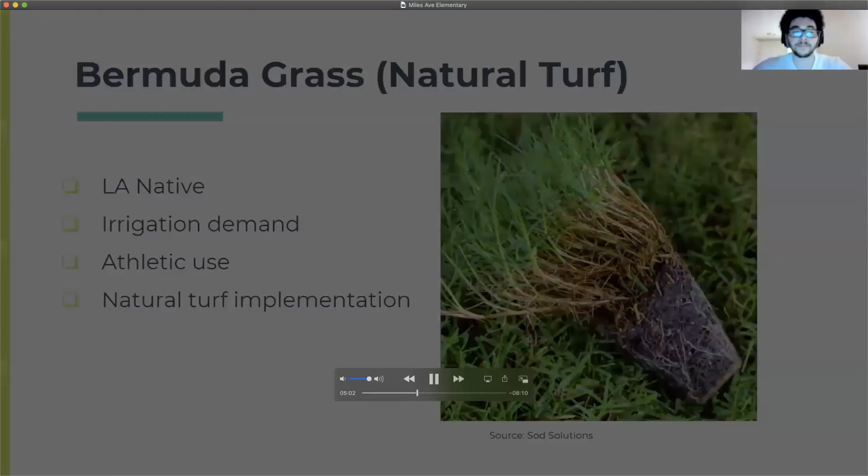So we propose the implementation of an extensive green roof on our site. It would sit on top of the existing parking structure, which is already used for recreation. For this reason, we believe it would be a good site for an athletic field, and we chose Bermuda grass as the vegetation that would be the best fit for the site. We also chose 20 centimeters of soil for the growing medium, which would reduce irrigation demand, and then the rest of the layers of the green roof would be the standard layers.

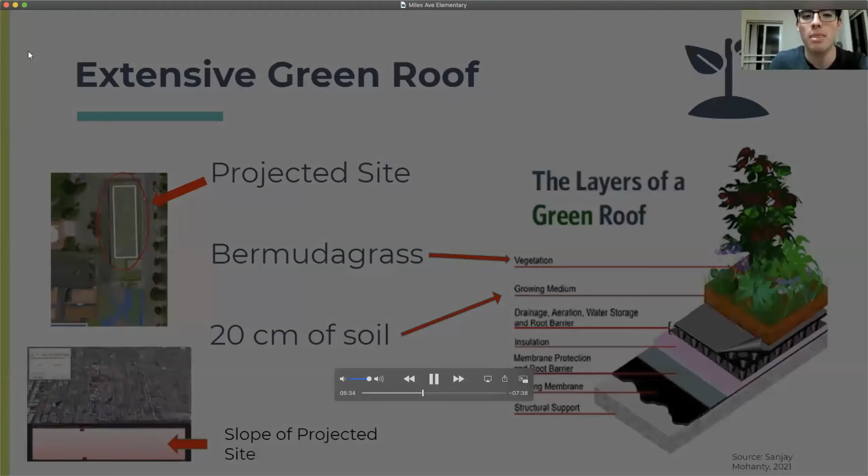And this green roof would capture about 476 cubic meters of water per year.

So one of the biggest issues at Miles Avenue Elementary School is that it's covered by 86% impervious surface, most of which is blacktop in the parking lots and on the playground. This surface contributes to both increase in runoff and pollution of stormwater, as well as raising the temperature of the school grounds due to the urban heat island effect.

To mitigate these issues, we decided to install permeable pavement in the school parking lot, on the playground, and on the running track, as it allows for water to infiltrate into the ground during rainfall events, which reduces surface runoff and has the potential to reduce the urban heat island effect through evaporative cooling.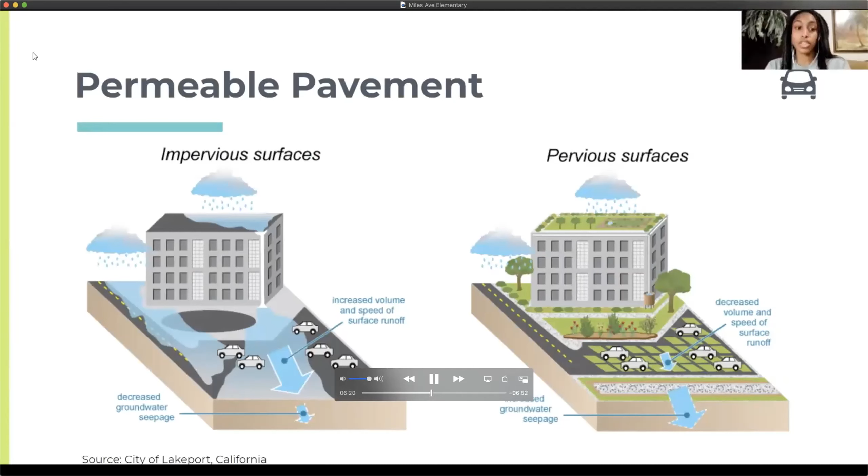Since our project design requires a lot of water to maintain, we decided to include an underdrain with a raised outlet and an impermeable liner below the reservoir layer to maximize stormwater capture.

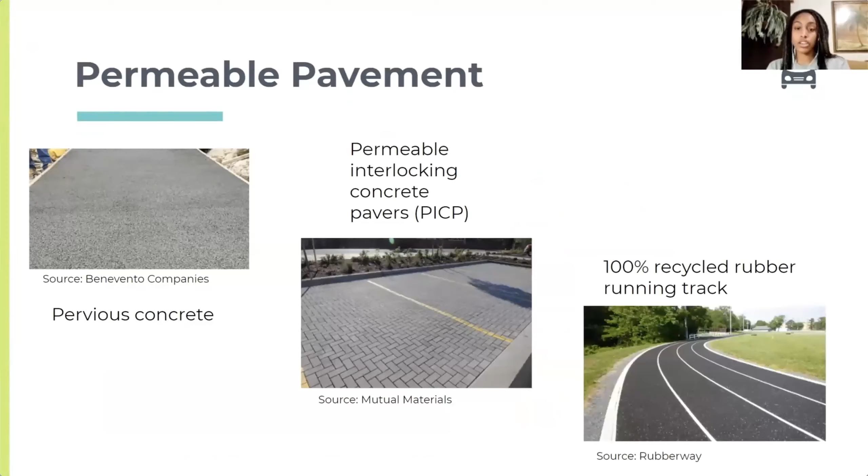So we use 3 different types of permeable surfaces. For the main playground, we use pervious concrete. For the parking lot, we chose permeable interlocking concrete pavers. And for the running track, we used 100% recycled rubber.

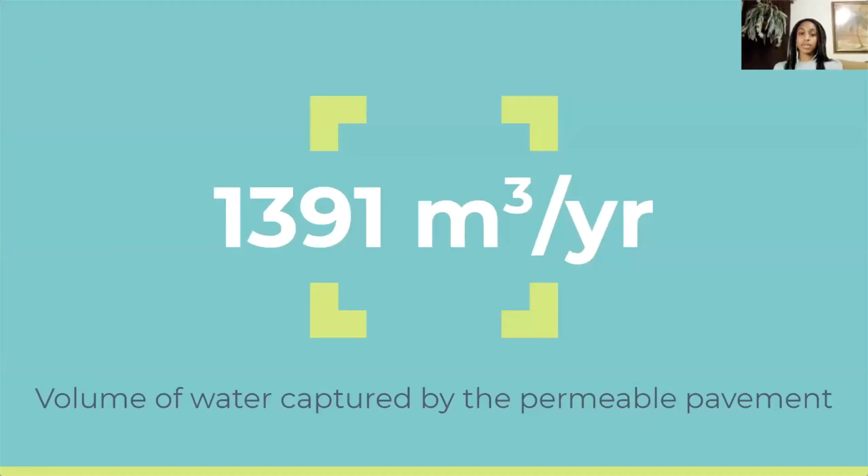So the total volume of water captured by the permeable pavement system is estimated to be 1,391 meters cubed per year.

So with design goal 1 and 3 being stormwater capture and decreased urban heat island effect, we decided that it would be beneficial to install a biofiltration swale next to existing drainage and along the edge of the parking lot.

So the swales will have rocks placed at the inlet for the pre-treatment phase to avoid flooding the bioswale and risking erosion or reduced infiltration.

And then for the plants, we're going to plant native species that don't require as much water, but they can still ensure stormwater capture without needing to have a lot of maintenance.

Then the retention area was calculated to be 1.5 feet deep for the ponding, just to maximize infiltration and groundwater recharge. And then for the filter media layer, we'll have a 3-inch layer of mulch on top of a mixture of sand, topsoil, and compost for the bioretention mix. The recommended depth for that is about 3 feet.

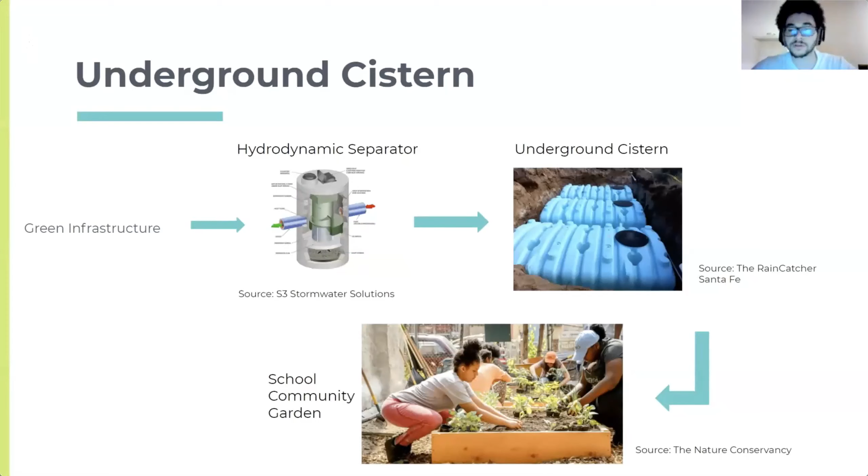And here is our annual water cycle. Although we project that the water cycle will not be self-sufficient and design goal 1 will not be met, we believe that a lot of the costs that we incur in terms of water costs will be used to help us create a self-sufficient energy cycle, as well as meet our various other goals that we proposed previously.

And now we'll talk about the social benefits. So for the social benefits, we propose to build a community garden using planter boxes to grow nutritional food crops, as well as native.

Hello, everybody. Welcome to our CEE159 final.

It has been noted that the implementation of green infrastructure can have positive health and developmental effects on children in school. The addition of green infrastructure helps to increase the social capital of an area by increasing the space for the community to come together and interact with one another. In schools, it can also block out excess sounds and pollutants, which will help mitigate stress that students experience throughout the day, resulting in the students having a better environment to learn and engage with their schooling.

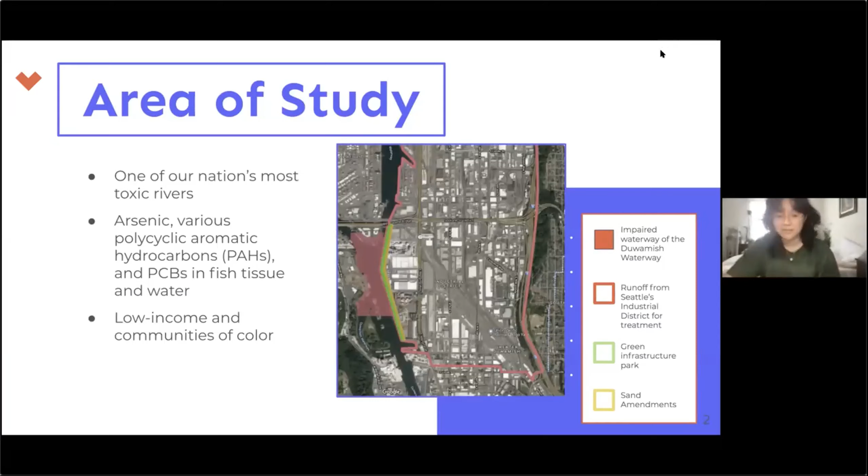So as a result of the industrial district that's located near the waterway, chemicals such as arsenic, various polycyclic aromatic hydrocarbons and PCBs are found in the runoff, consequently being found in local fish tissue and the waterway. Moreover, this waterway is located near low income and communities of color, furthering the disproportionate effects of pollution. We plan on creating a filtration park to mitigate the effects of these contaminants and the runoff. Pictured here, we can see the outline of the waterway and the runoff area in relation to the park that we plan on implementing.

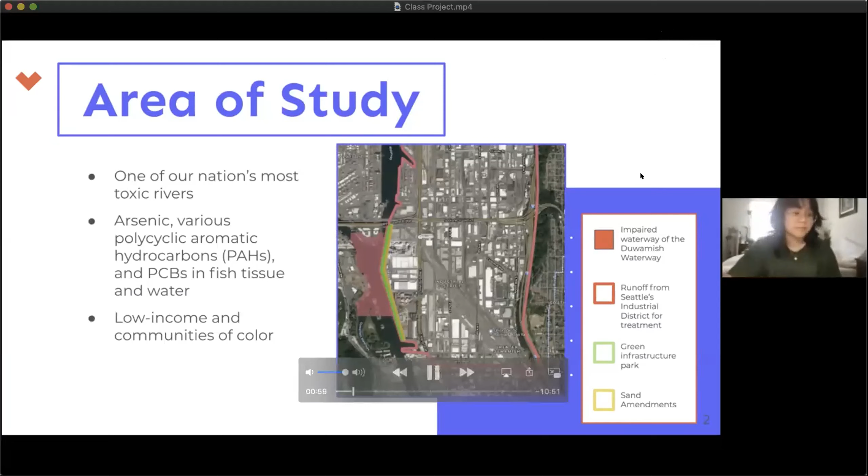Various health detriments are found from arsenic, PCBs, and PAHs which are found in the waterway, including the impact on young children's memory, attention, motor skills, and language development, and ultimately a risk of death. Fishing culture is also prominent in this area, and there is hence a higher risk of ingestion of this highly contaminated fish. With the bioaccumulation of these contaminants in our shellfish, crustaceans, and fish, the cycling of these contaminants in the ecosystem is detrimental to both the ecosystem and humans.

Our green infrastructure plan focuses on addressing these ecosystem concerns by revitalizing river wildlife and protecting people from these contaminants. So our project has three main objectives. The first is to reduce those toxins like arsenic, PCB, and PAH in the water, and subsequently in the wildlife. The second is to provide recreational opportunities. And the third is to educate and engage the community with green infrastructure and to connect that to the resulting

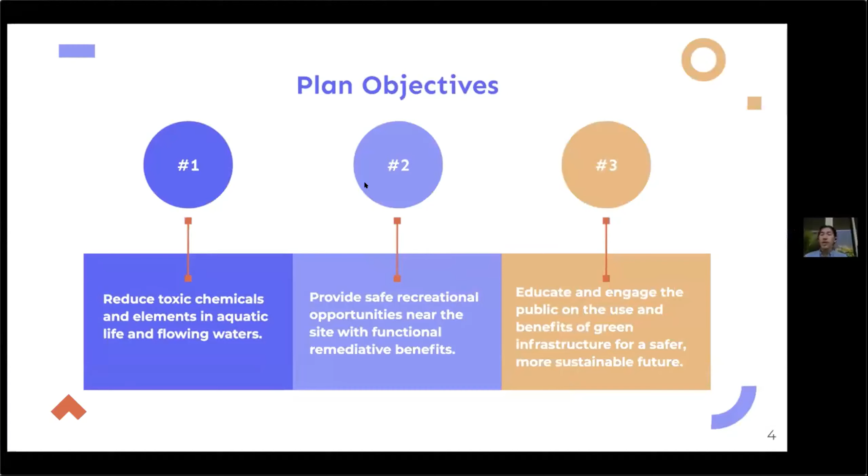health and environmental benefits. So specifically for our green infrastructure, we plan to implement multiple methods for toxin removal. These include a sand filter with added amendments as a primary treatment. And then between the sand filter and the river, we will implement a wetland designed to remove arsenic, PCB, and PAH via adsorption, precipitation, and phytoremediation.

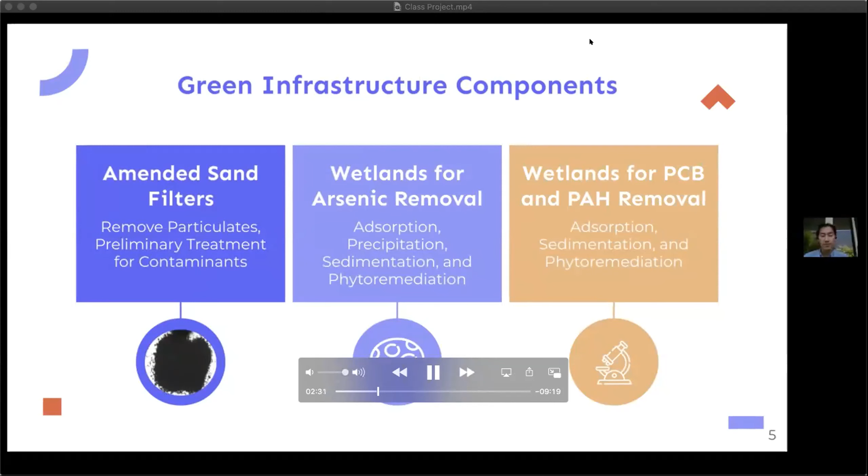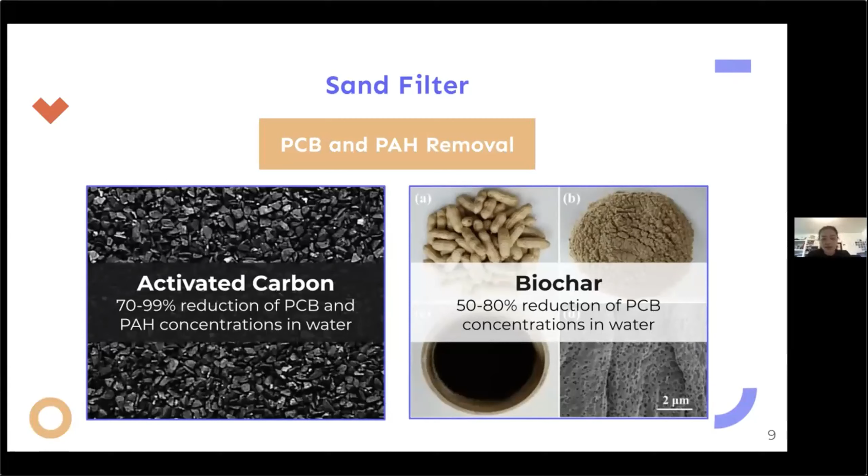For arsenic removal through adsorption and precipitation in wetlands, we plan to use a gravel with a high iron content as the bedding, as gravel itself does not absorb arsenic well, but iron does. We also plan to introduce sulfate-reducing bacteria, or SRBs, to aid in arsenosulfide production, including species of Desulfovibrio sulfodismutans, Desulfobacter hydrogenophilus, as these species precipitate insoluble species of arsenic that are less toxic than their ionic forms.

We also plan to include mineral amendments with a high arsenic removal capacity of more than 99%, including limestone, zeolite, and ferric oxyhydroxides. However, there are certain environmental conditions necessary for these adsorption and precipitation reactions, including a pH of slightly basic to neutral for absorption and anoxic conditions for our SRBs in the subsurface environment. Therefore, we would need continual monitoring of the wetlands to ensure these conditions are met.

For the inclusion of plants in wetlands for arsenic removal, arsenic is released upon decomposition of plants, hence the need for harvesting. However, there are root soil interfaces responsible for arsenic absorption, precipitation, and chelation through microorganism interactions that create optimal oxidative and reductive conditions. The inclusion of insoluble organic matter such as humic acid is beneficial for arsenic absorption as the insoluble organic compound has a high absorptive capacity for arsenic removal.

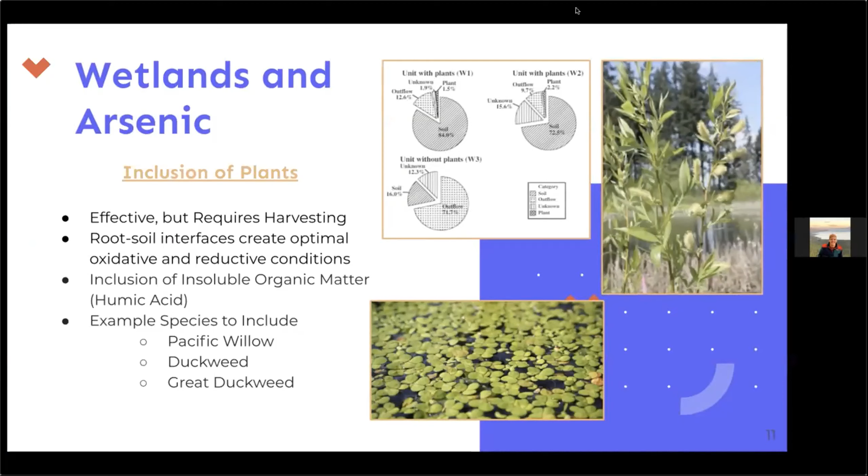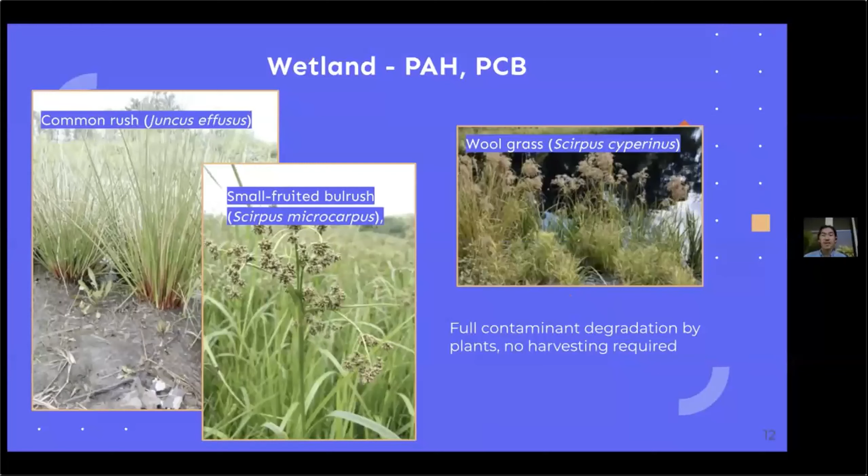And finally, some example species to include in our native wetlands for arsenic removal are Salix lasiandra, Pacific willow, Lemna gibba, which is duckweed, and Spirodela polyrhiza, which is great duckweed. So for our PAH and PCB organic contaminants, we will also be implementing some plants for phytoremediation. These could include common rush, small fruited bulrush, and woolgrass. And because these are organic contaminants, the plants can actually break them down fully, so there's no need to harvest these plants.

So now we'll move on to how our research applies to addressing our objectives. Our first objective was to reduce the amount of arsenic, PCBs, and PAHs flowing into the water and bioaccumulating in the aquatic life of the Duwamish waterway. After our research, we decided to choose iron oxide coated sand and activated carbon as amendments for the sand filter park, since they showed high removal capacity for arsenic and PCBs and PAHs. We estimate that the sand filter portion will remove a majority of the targeted pollutants from the runoff, and the rest of the pollutants will be removed by absorption and precipitation in the wetlands.

We were able to find many plants native to Seattle that are hyperaccumulators for our targeted pollutants. So by the time the runoff has passed through the wetlands and reaches the Duwamish waterway, we believe that it will have negligible concentrations of arsenic, PCBs, and PAHs. And this will help the waterway meet its TMDLs for those pollutants. Additionally, reducing the pollutant concentration in the waterways will help to reduce the bioaccumulation of those chemicals in the local aquatic life.

Our second objective was to provide safe recreational opportunities near the site with functional remediative benefits. Our green infrastructure plan not only functions to reduce toxicity within the Duwamish waterway, but would, as a result, help improve the surrounding ecosystem and wildlife. A study done in the Duwamish industrial area found that salmon died within 4 to 6 hours when exposed to stormwater runoff from a local highway. However, when researchers filtered the highway runoff through a soil mixture first, the salmon had a 100% survival rate. Therefore, by targeting the region's area of contamination with our green infrastructure plan, we can not only improve ecosystems within the industrial regions, but also improve the habitat throughout the Green Duwamish River and initiate necessary salmon remediation.

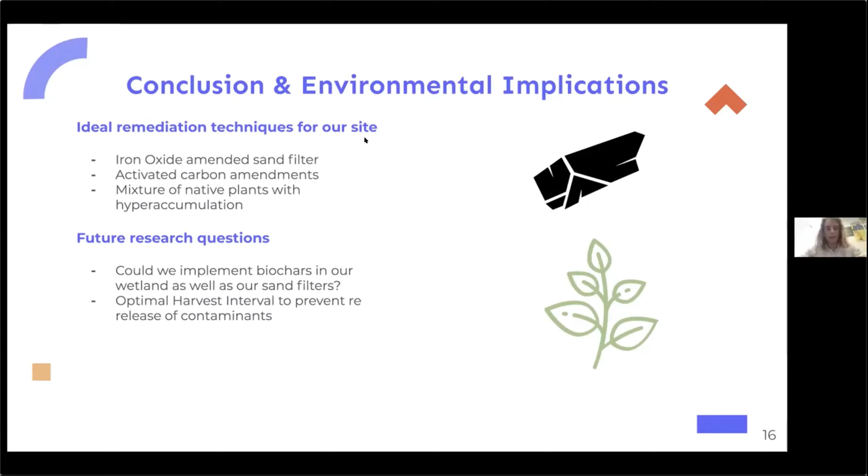One comment is that you can mix iron chloride with biochars and/or pyrolyzed biochar, so that will create more iron in it. So you don't have to have two different things at the same time.

I just want to say that the way I evaluate the presentation is based on story. I don't take any points off. I didn't say that before, but obviously if there was a really bad presentation, I'd take some points off. All of you get 10s on that, 100% as far as presentation is concerned. So great job, you all.